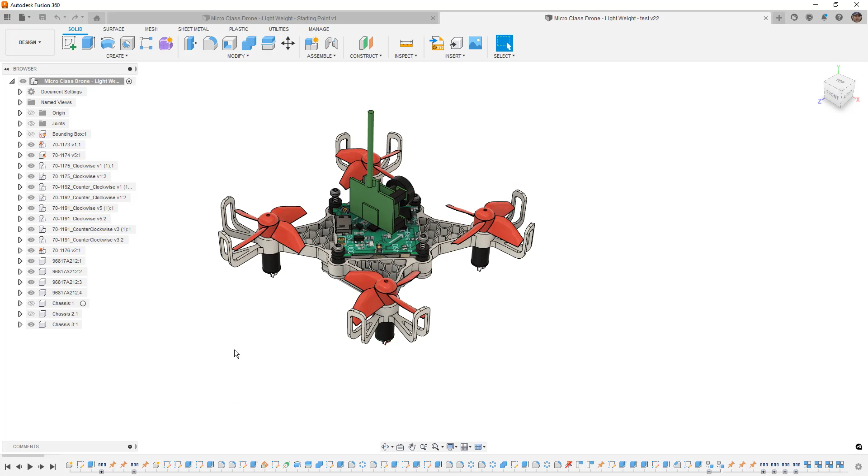So with that in mind, what you see on the screen is going to be a sample. We're going to design something similar to this, not exact. Now, I have printed this chassis and flown it, and it does pretty well. And we're going to talk about some of the criteria, the design elements that we need to follow for that. The starting point that you can download is going to be the motors, the propeller, the flight controller, single battery, and a camera.

Now, it is important to note if you are going through the Airgineers sort of competition, in order to power the camera, you'll need two batteries or you'll need to modify the wiring so that you can plug the camera and the flight controller into a single battery. Now, there are pros and cons to each of those. The pro with running a single battery is weight. You obviously are quite a bit lighter if you're only running one battery. The downside is flight time, so that's something that you need to play with and balance.

Now, I have done an entire drone series before that's on Coursera and I believe Udemy right now. This was a full series that was, I think, in 2017, where we talked about things like the thrust of the motors and propellers and picking all those different design elements out and understanding where you sort of had to be in terms of chassis weight for the performance that you were getting. We're not going to be going that deep into it, but I will give you some basics on some of the ranges that your components should fall into.

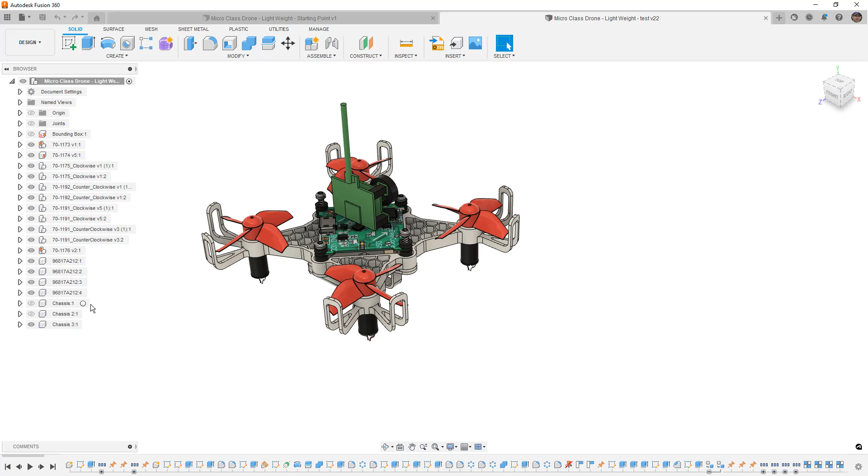So with this chassis right now, this is going to be around 7 grams, and it's missing some components still. So when we look at the physical, you can see mass here is 7 grams. The thing that it's missing is a camera mount. Now, you don't necessarily need the camera or 2 batteries to fly this thing. You can fly it with line of sight. But if you do want to use the goggles and you do want to fly it as a first-person experience, then you will need to include those elements.

Now, the 7 grams for the chassis right now, again, doesn't include any of the components like the motor, the prop, the controller. Those are all sort of fixed elements. Everybody would have those, and it's not going to matter if your design has something different in those areas because they're all going to be the same across the board. That's part of the reason for the competition. A starting point, everybody has the same equipment. Where you're going to want to focus your attention on is the main chassis, as it's going to be the biggest item in your entire design.

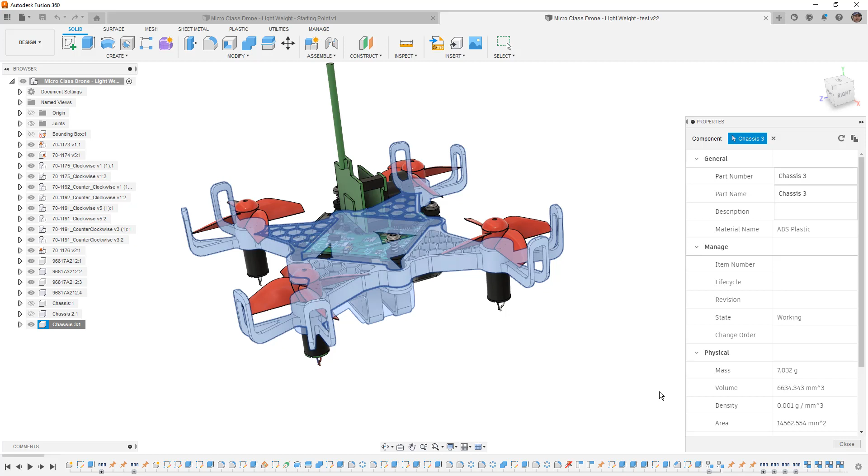Now, when I did this course originally, I found that all of the plastic pieces together around 10 grams was sort of the upper limit. You didn't really want to go past that 10 grams for all of the plastic components that you're using. And the reason for this is that you just don't really have the thrust or the propulsion to make that work. So with that in mind, the main chassis should really be somewhere around 4 to 5 grams. The lighter, the better, obviously. And that's a balance that you're going to have to figure out where you really want to spend time saving weight.

Now, what I ended up doing for this original version is I really wanted to focus on using some lightweight techniques, in this case, using some sort of hexagonal structure and very minimal frame around the outside. You can also see that I added some additional components underneath here. These thin pieces were screwed on with the same screws that held down the flight controller and the camera, and they're used to house the battery and prevent the battery from sort of contacting or going into this pocket area.

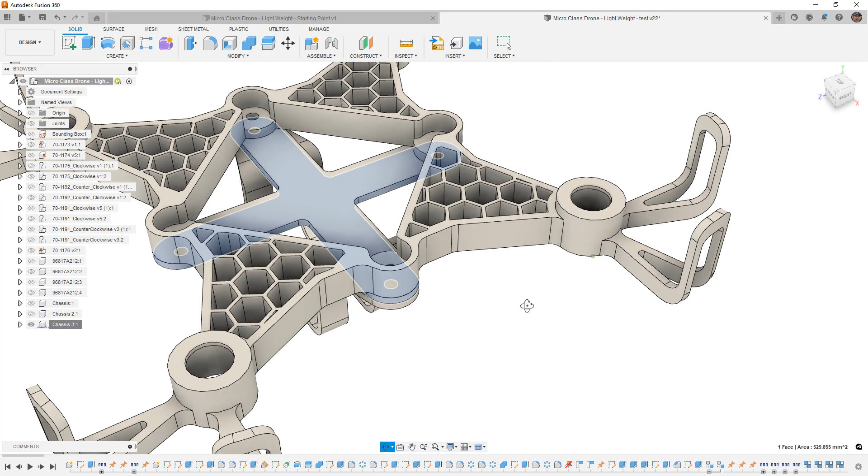And there are a couple of reasons why I went that route, and we'll talk about that just a little bit. But this is going to be sort of the main workflow that we're going to talk about. With that in mind, there are a handful of general design notes that we should cover as well. After we get through these design notes, then we'll start to get into the CAD section.

But if you're watching this video, you're likely interested in understanding some of those design decisions along the way, and having a good foundation for what your end goal is important before you ever start any sketches or features. So the list, when I think about a project like this, the first thing that comes to my mind is what method are we using to print?

Now, in this case, I'm using a desktop FDM machine or FFF machine. That is going to be, for me, a Creality Ender 7. And this is a really good machine because it's relatively fast. There are plenty of other machines on the market depending on what you have access to, whether it's an SLA machine or SLS machine if you're at a university and you're ordering your parts. And you can obviously choose whatever process fits your requirements. There are going to be pros and cons to each of these.

Now, with the FDM machine, desktop machines, you have a whole host of material choices. I'm going to be using a PLA, and one of the reasons I like to use the PLA material is it has really high quality on the final print. It's not really going to survive the test of time, and it's not really heat stable or moisture stable, but there is a level of the ability to biodegrade these PLA materials depending on what you have. So that for me is a big benefit, especially if I'm going to be doing multiple prints to try to fix or finalize the design. I might do a lot of that in a material that is more environmentally friendly, like PLA.

Now, obviously, if you're using like an SLA machine, you have a lot of material that you need in the resin, and then you also have cleaning material, and there's all sorts of implications to using those types of printers and materials for your final parts. So I'm going to be focusing on, again, FDM using a PLA material.

Now, obviously, if you have a pretty solid final design, you want to use something like a PETG or an ABS-like material, then you will have to think about the speed at which you can print as well as the quality of the final parts. And the reason for that is because we have small holes on this part. We have a somewhat press fit for the motors, and these are all criteria that we need to think about.

The next thing that I begin thinking about after I've chosen the printing method and I've chosen my material is going to be the geometry. Now, the geometry in this case, if we take a look at it, the reason I have included this extra piece on the bottom for the battery and this extra piece here to hold the batteries in, the reason I've done that is because I want the entire bottom portion of my chassis to be flat.

Now, the reason I want it to be flat is because I want to print it completely flat on the build area without any supports or raft or anything that I have to clean off afterwards. With that in mind, everything here that you see can be printed unsupported. There is one slight exception to that rule, and that's the little lip at the top. That is going to be the stop for the motor. Now, we can get around that because the top of the motors aren't completely flat. They do have a little bit of a radius to them.

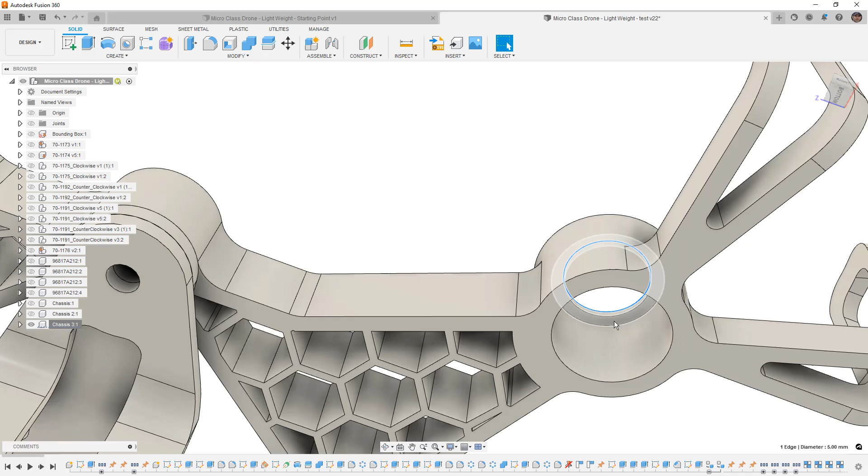So you can put a small lip on the top and a very small chamfer on the inside and help with that unsupported nature. You obviously wouldn't want to make this diameter very small because then you have this huge unsupported area. And if you have support material building in that area that you have to clean out, it's going to be a mess. Now, some printers are better at the support material than others, but I've just found in general that these FDM machines, if you can get away without support material at all, your final design will be much better off. And that's simply just because you don't have to sit there and post-process it. So that is a reason why we have these extra little pieces.

Another reason here is that these can be printed relatively thin. They're not structural in nature. This is going to be holding the batteries, and this is really just a block plate. So this can be relatively thin. It doesn't have to be printed very thick. And if we take a look at this, you can see that if I look at this in millimeters, so right now we've got secondary units in inches, 1 millimeter thick, 0.039 inches.

That is a really thin part, and it works just fine in practice. I'm running the screws all the way down through all of these. I do have nuts that I could put on the backside. I have found that I don't really need them as long as I drill these holes out the right size.

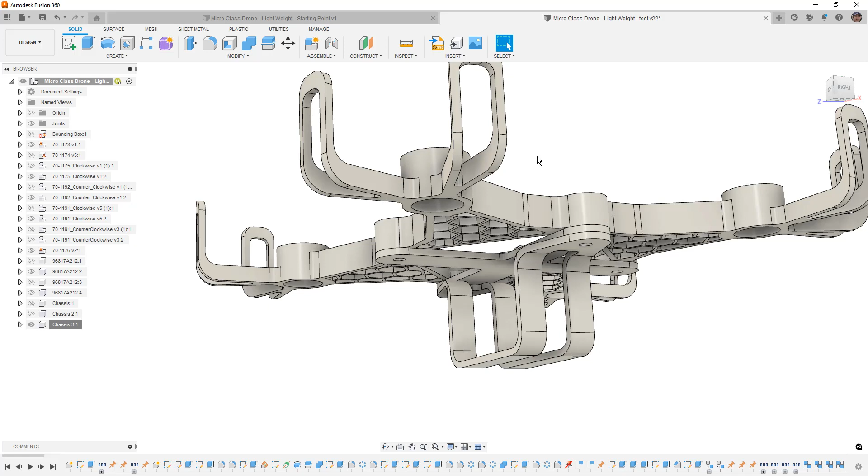So, those design elements of understanding the limitations of the printer, whether or not you're going to be designing for support material, and things like what the overall unsupported angle your machine can print is. Now, with the Creality that I'm using, it's 49 degrees. I can go up to 49 degrees and it will do just fine.

Anything above that, you start to run the risk of getting these strings in the air from trying to print on this unsupported area. Sometimes it'll work okay depending on the orientation of the slicer. Sometimes it won't, and it's kind of just something that you have to think about. So we're going to be going forward looking at building something without support materials at all, and that's going to influence our design decisions as we go through.

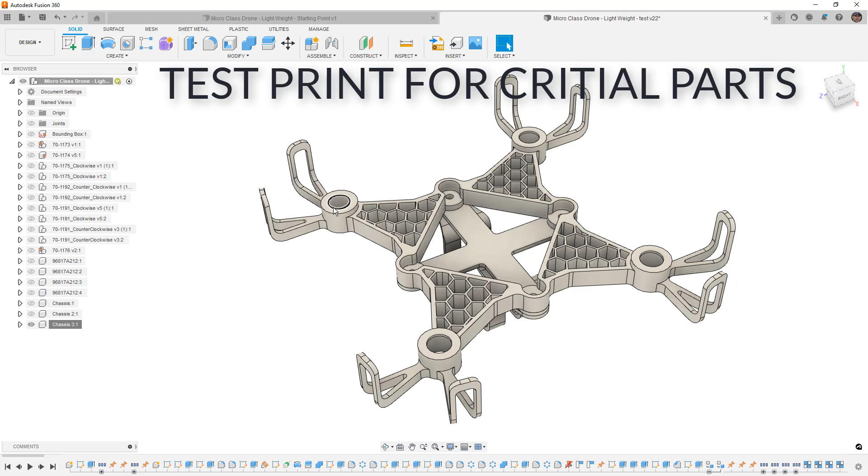So another thing that we also need to think about is going to be test prints. And what I mean by this is that if you print a 6 millimeter diameter boss, is it actually 6 millimeters when it comes off the printer? Now, you'll find that depending on the material you're using, depending on the printer itself, depending on its resolution, the resolution of the STL file that you output, all of these different factors are going to come into play when you talk about the size of those features.

Now, in this instance, I have done a couple test prints to figure out what size I need to print to get a good press fit on the motor. You don't want it to be too tight, but you also don't want it to be too loose that you have to glue the motors in. These motors are small and they tend to burn out after a certain amount of time, so you want to be able to replace them if needed.

So what I found through some testing is that if I design a boss at 6 millimeters, it actually prints out at 5.7 millimeters, give or take. Now that means the 6 millimeter motor is not going to press into that. It's just too far off. So I need to up my size by about 0.3 millimeters. So if I print 6.3 millimeters, I end up with about a 6mm boss so I can press the motor into it. This is something that you need to figure out when you're doing your design, is to really understand what the resolution, the final output of your part is going to be.

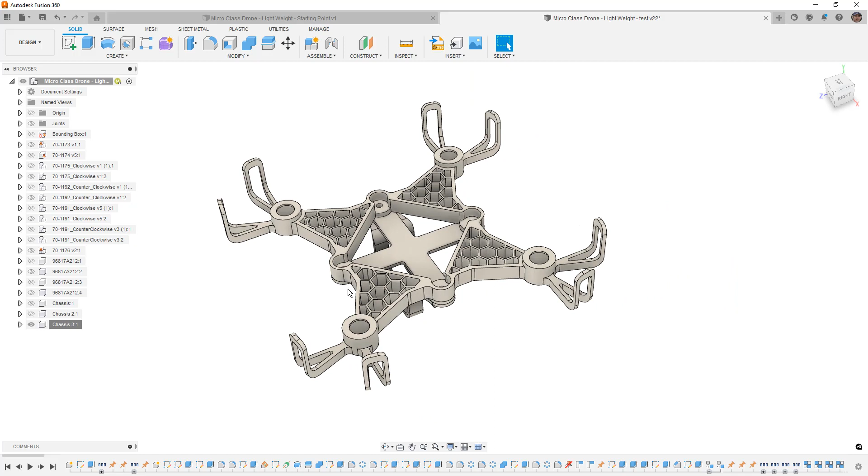So now that we have all of that out of the way, I'm going to move over to the starting point. This is the data set that you can download, and we're going to talk about how I would start a design like this. So first of all, the camera, I don't really need to see it. It's not going to be a big part of this. The flight controller is important, and some of the reasons for that is because we need to make sure that our chassis design doesn't go over these connectors. We need to go around the outside of those connectors.

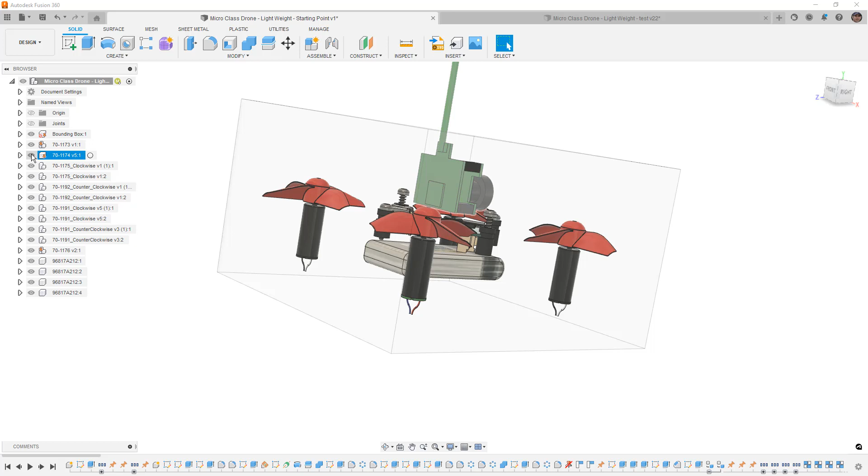The propellers are going to be somewhat fixed, and the reason that they're where they are, again, is based on a bounding box for the competition. Everything needs to fit within that, including the camera, not the antenna on top, but there are requirements that you need to follow if you're going to be using sort of the Airgineers format.

Now, I think it's good as a practice to have an end goal and some design constraints. Otherwise, you can just go down this sort of endless design iteration. You need to have an end goal in mind, and the end goal for us is going to be a chassis, and we're going to shoot for around 4 grams with an ABS material.

What I found that is also important when you are printing, depending on what printer you're using and what slicer, is when you slice the part, oftentimes it'll tell you how much material is being used, and you can kind of correlate that to the mass properties in Fusion or whatever CAD file you're using to see how close those are. So if I say that my chassis is 4 grams and I take it to the slicer and it's telling me it's 6 or 7 grams, that's obviously a very big difference, and we need to understand and account for that.

So with that all out of the way, let's go ahead and get started on the design.

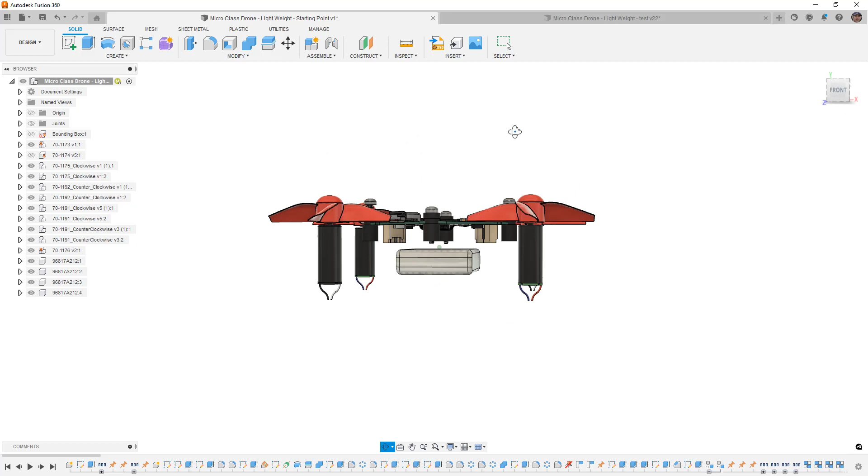So when we think about a design, there are many different ways that we can go about the overall process of design. We need to think about if we want propeller guards and how much we want to build out. If we take a look back at the Airgineers site and we take a look back at the original design, you can see the original design goes completely around the propellers. It's offering up an entire guard for those propellers.

You can see that the design that I did actually went a little bit further with that concept and made some cones to help funnel the air and get more lift. Now, ultimately, that's a lot of weight that you have to add. So these are all design decisions, and if you want to go the route of building an entire shroud for the propellers, then there are other aspects of the design that are going to be problematic. Things like the camera view, the overall mass, and all of the components there. So all these are important considerations that you need to think about when you're getting started.

For me, when I want to start a new design like this, I think about symmetry. Now, this entire design is based around the origin. If we turn the origin on, it's right in the center of the controller, and everything is going to be able to be patterned. So we can just work in one quadrant, and I like to focus on the upper right-hand quadrant. This is typically quadrant 1 or the positive quadrant if you're thinking about a coordinate system in math. So I like to focus on that, which is going to be X and Y positive in general.

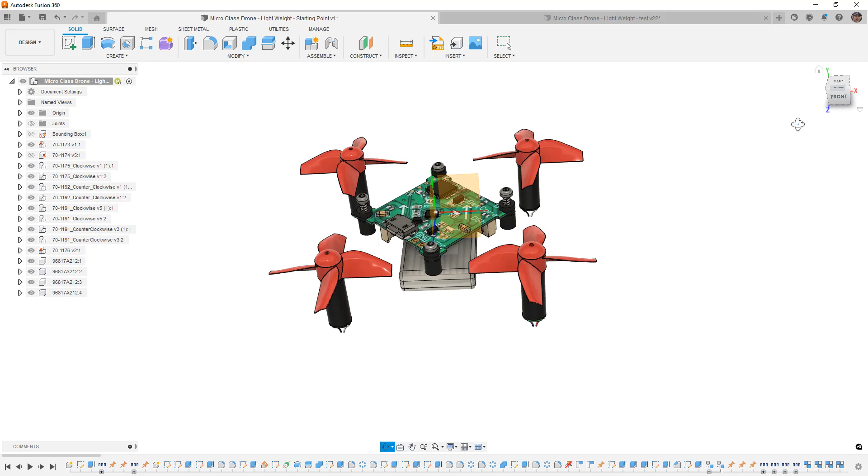Now, it depends on the orientation of your design. This is built in the Y up orientation, so really it's looking at positive X and negative Z. Doesn't really matter because as soon as we make our sketch, we're just dealing with X and Y. So I want to focus on that upper quadrant. So none of this stuff really matters to me. I'm going to leave it visible for now, but it really is just going to be a pattern.

And then what I want to do is I want to think about how I want to ground or start my design. Now, the main aspects of this design are going to be the top of the motor. So the top of the motor here is going to be sort of a fixed position, and the bottom of these spacers for the flight controller. So those two areas need to be connected, and everything else is just going to be extra. So really, I want to build from the top of the motor down to the bottom of that spacer, and that's going to be my starting point for my design.

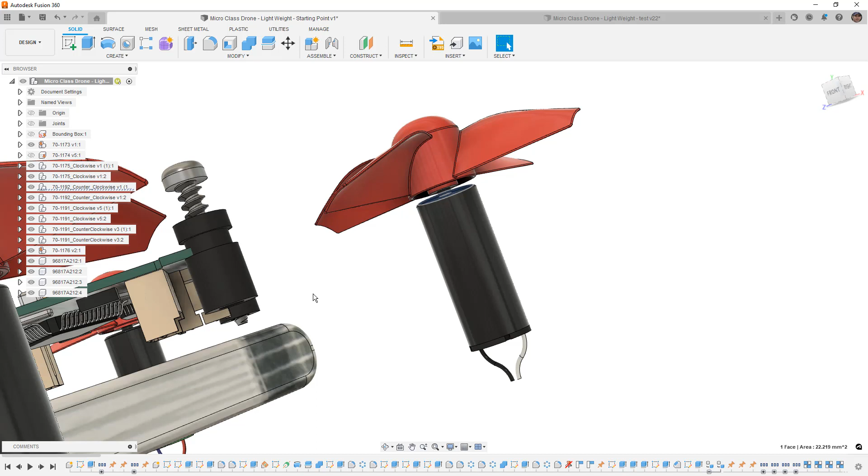So I'm going to select the top of the motor, right-click, and create a sketch. Now, when we start the sketch, I want to start projecting some elements. First, I want to get rid of the propeller for right now. I'm going to bring it back, and I'm going to use Create, Project, Include, and P on the keyboard, or select Project here. Now, what I want is going to be the outside of the motor and the outside of each of these bosses. And remember, we're working in this quadrant, so we're going to be connecting these together.

The other thing that we need to think about, again, is going to be obstructions on the flight controller itself. There are connectors underneath that need to go down past the battery, and if we build too much underneath the board, then we're going to have problems. So what I want to do is I want to think about the sizes that I need, and I'm going to use the circle tool to get started. So from the center here, I'm just going to draw a couple circles. I'll dimension them after the fact.

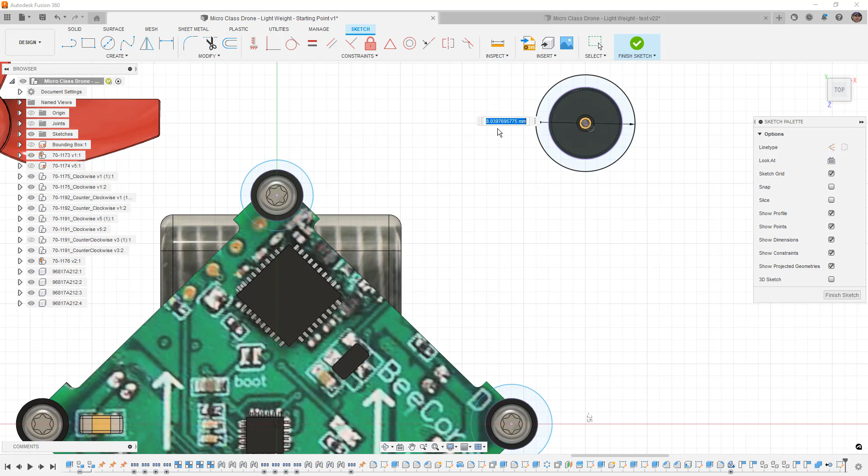I know that this one here is going to be 6.3 millimeters. Again, that's based on the fact that I did a test print and I know how big this needs to be in order to print, so I'm going to say 6.3 millimeters. Another thing that I like to do is turn these inside edges to construction.

So I'm going to say construction for that, and if there's any inside, we're going to say construction there. And the reason for that is when we select this geometry, we want to be able to just select this and get just the full circle there without grabbing all that other stuff. So you might want to go in and just make some of those other projected lines construction.

When we're thinking about the flight controller mount itself, we want to give a little bit of a buffer because these are actually rubber spacers, and when you tighten the board down, they tend to swell a little bit. We want a support structure in place so that they don't swell too much, but we don't want to just exactly match that size. Things in CAD tend to be very precise, but when you get to the real world, you'll find that these spacers might be a little bit bigger, a little bit smaller. The print might be a little bigger or smaller. We obviously know that the print itself needs to be just slightly larger.

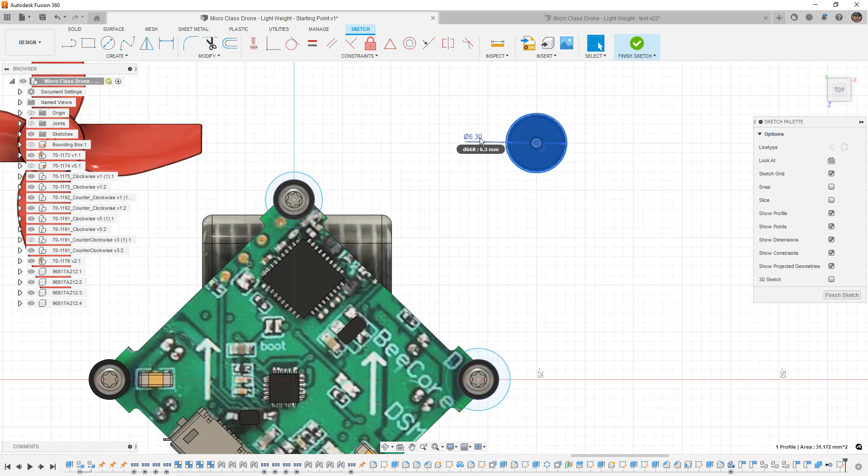So what I'm going to do is I'm going to dimension these, and if I give it a 5 millimeter dimension, you can see that gives me a little bit of a buffer there. Now at this point, we need to think about constraints and constraining all these elements together. If I add another dimension here and click on this 5, that'll link them together. You can also use the equal constraint. It kind of depends on how you like to work.

Now, if I'm adding dimensions, oftentimes I'll link dimensions together simply because it's just quicker if the dimension tool is already active to click on another element and click back to that first dimension rather than hitting escape to get off the dimension tool, selecting the equal constraint and selecting everything. It's just a little bit more efficient in the overall process of the design. And depending on what the end goal of your part is, whether or not you have 2 dimensions or 1 dimension and 1 constraint, it's not going to affect the performance of the design drastically.

So now we've got sort of our grounding points on the design. Everything here, again, is going to be patterned around. It could be circular or rectangular because this is a square. It really doesn't matter how we do that. But in this case, it's important to note that we're building everything from sort of the midline here and the midline here because everything's going to be patterned around.

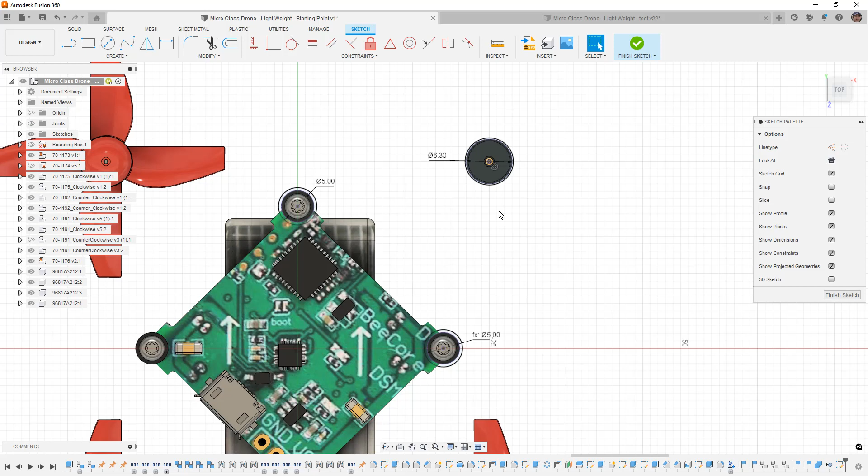The way that I like to think about my designs initially is I like to just start with lines from the center points and just see what that looks like. Now, if I'm happy with that shape, then likely I'll just continue on with that shape. Now, in this case, I don't want to go center to center.

If we look back at the other chassis that was drawn, you'll notice that there was this sort of horizontal section. Now, it looks like I'm on perspective only. There was this horizontal section where I came out from the mid and then I went up, and this is not the center point here, but you can see that I came out straight and went up and left this bump here. Now, part of the reason for that is to minimize material.

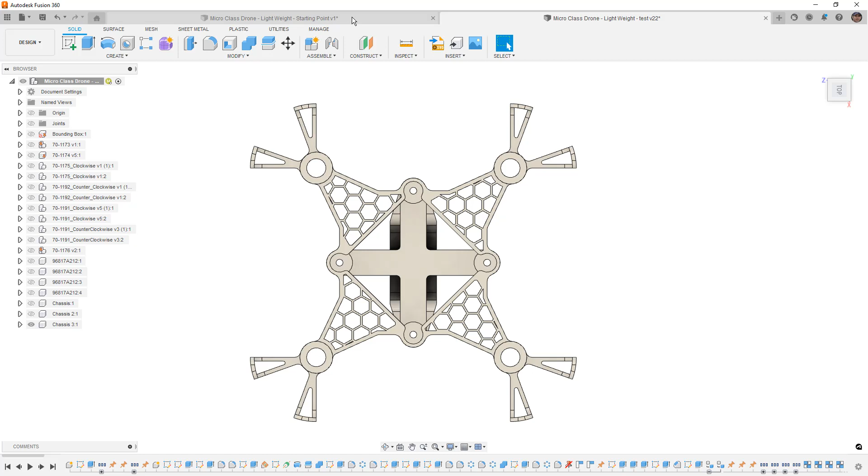You really don't need a ton of material. We're not talking about a ton of thrust or force from these motors, and you're really not talking about a huge overall mass. So the forces in the chassis are not really very high to the point where we need to worry about all of the extra pieces.

So some of the initial chassis that I played with, I've designed probably dozens of these at this point, but some of the initial ones I've done straight lines. I've also done straight lines between the props and built a square. But again, we want to minimize material. We want to be as efficient as possible. So I'm going to take these lines and I'm going to delete them. And I'm going to start with sort of the same structure.

I'm going to come out horizontally, and then I'm going to come up to that outside cylinder. This one will be vertical, come up to the cylinder. And then for me, I'm going to go center to center here. And then I'm going to draw center and perpendicular to the midpoint of that line. Now, I don't want to use this line, so I'm going to hit X to make it construction and X to make that one construction. Now, I'm going to use some constraints. I'm going to make this line and this line equal, and then hit escape.

Now, the reason for that is because I want things to update and adjust very nicely. Now, we still have an issue in that these points are not the same. Now, you might be thinking to yourself, we have this line. We could simply just mirror whatever we draw here across this line, and that is perfectly valid. That doesn't always work. In this case, it does because we're dealing with a square, but it doesn't always work

out quite that nicely. So one way that we can go around this is by using additional constraints or by using additional construction geometry. So what I'm going to do is I want to select this point here and this point, right click and say OK. That's going to essentially be escaping off the line tool.

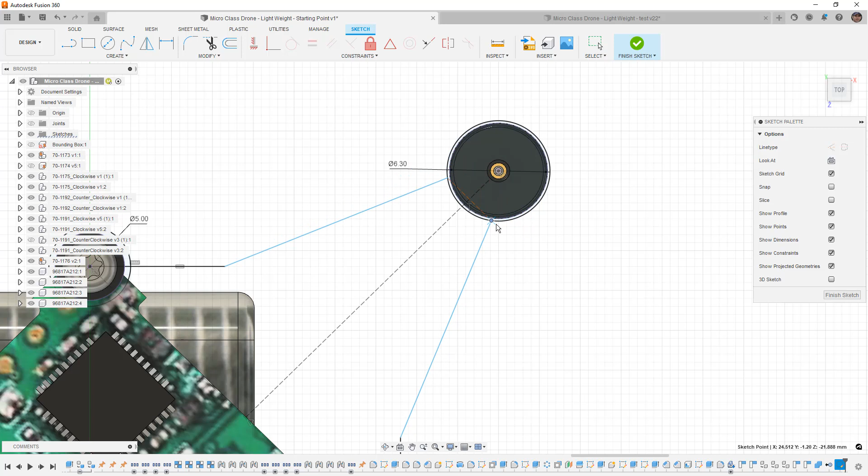Now, if I make this line perpendicular to this line and I hit escape, I'm going to go ahead and make that construction as well. Now, these are going to move the same. And really all I have to do to fully define this is tell it how long I want this line to be and what angle I want these to be at.

So I'm going to give this an 8mm dimension. And then let's go ahead and give an angle here. Let's say 20 degrees. That looks probably a bit too wide. Let's say 22. I think that looks pretty good. Now, the other thing that we need to think about again is connecting this to make some sort of solid structure. So I'm going to escape to get off my dimension tool.

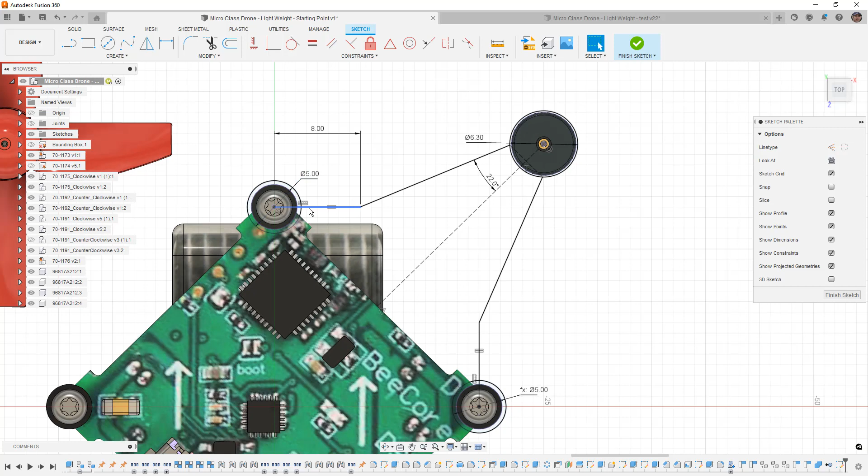And I really don't want to build underneath the board. The board is supported by these spacers. It doesn't need any material underneath it except for where the screw is going to be. So really what we could do is we could build out as far as we want, as long as we have material connecting these. So this is a relatively small amount of material here. And another thing that we need to think about is this is the inside wall of the area where our spacer is going to be.

So we actually are going to add additional circles, and I'll add another one down here. And these are going to have whatever overall wall thickness we're going to work with. So for me, I'm going to focus on 1mm. And in this case, let's go ahead and use the equal constraint just to show the difference. So I had to get off the dimension tool, select the constraint tool, and then select both of those.

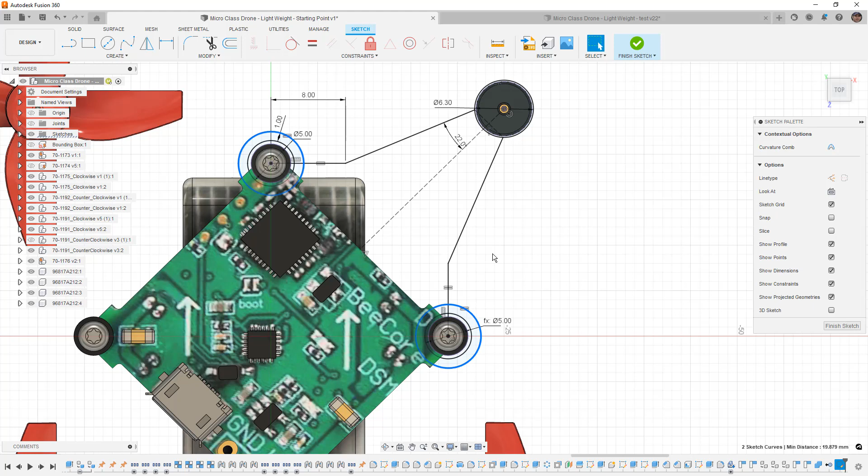Now, if you have been using Fusion for a while, you might have also noticed that the right-click menu, if you make a selection, will list any constraints that can be applied here. So two circles we can have equal. They could theoretically be tangent to each other if their centers weren't already fixed. We could fix, unfix them, basically lock them down without giving them a dimension. And again, if their centers weren't already fixed, we could make them concentric.

So that right-click menu is pretty handy, especially noting that it's contextual. So two lines, we could do collinear, parallel, perpendicular, equal, fix, unfix, and so on. So that is a slightly quicker way to get to your constraints, but it still, for me, takes a little bit more time than just making an equal dimension.

Also keep in mind, if you use tools like offset, you can add an offset dimension, but each time you select additional geometry, it will add that additional dimension, and those will not be linked together. You'll have to go back and manually link them or delete them and make things equal. So again, it's just a matter of efficiency. Not that one way is right or wrong, but I find that using the linked dimensions is quite a bit quicker, especially as you're progressing through your design.

So now that we have this additional thickness here, that adds a little bit more material here, and I can take a line and I'm going to go from sort of this inside section down to this one here. And once again, we're going to make this perpendicular. And really, as long as we stay outside of this portion of the board, we'll be fine. But I want to give it as much room as possible.

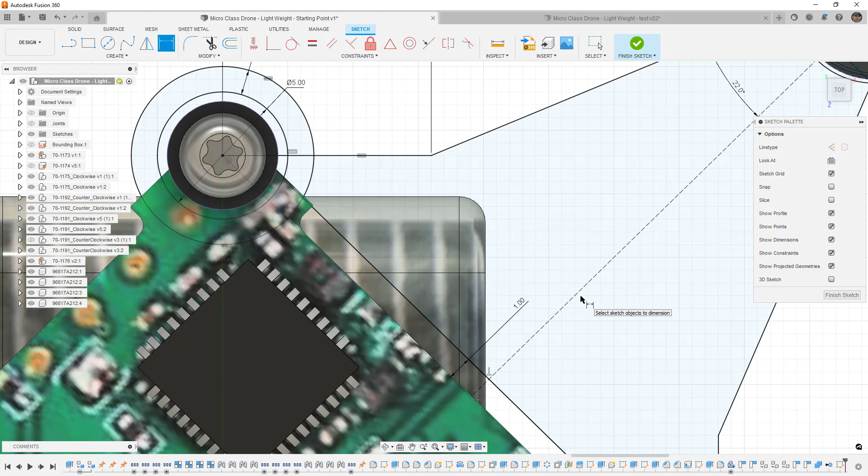So what I'm going to do is I'm going to figure out what this distance here between that point and this line is going to roughly be. So I'm going to use D on the keyboard for my dimension tool. And it looks like it's about 1mm. And I think that's going to be fine for us.

So again, what we're really looking to do is we want to make sure that we build a chassis that is as light as possible. Now, if you find that this isn't enough material, this line doesn't have to go to the center of the screw boss. It could raise up, or we could determine a different angle here. So if we were to change the angle and shorten that line up, we could potentially get this just to angle all the way back into this piece.

I think it's going to be fine for what we're doing. There will be more material underneath holding it together, potentially. So just keep that in mind that we're going to add things like a fillet in this corner, which will bridge this down. That can be a relatively large fillet. All of these different things that we can do.

So now that we have this, we also need to think about the fact that our circle here is going to be the small diameter that's going to be around the motor. So we need to think about how much material we want around that. Now, in general, what we're looking at is a millimeter, which actually isn't very thick. You might potentially get deflection issues when you press the motor in to something that thin. For this example, I'm going to go ahead and stick with a millimeter.

I'm going to link it to another dimension. And once again, this helps me because all I have to do is go back to this dimension, and let's say I want it to be 1.5. All those elements will increase together, and I don't have to worry about adding additional dimensions. One thing that we can also do is we can name this. So I can call this wall thickness and say equals 1. So now when I go into my modify and change parameters, I have this custom one that was called wall thickness.

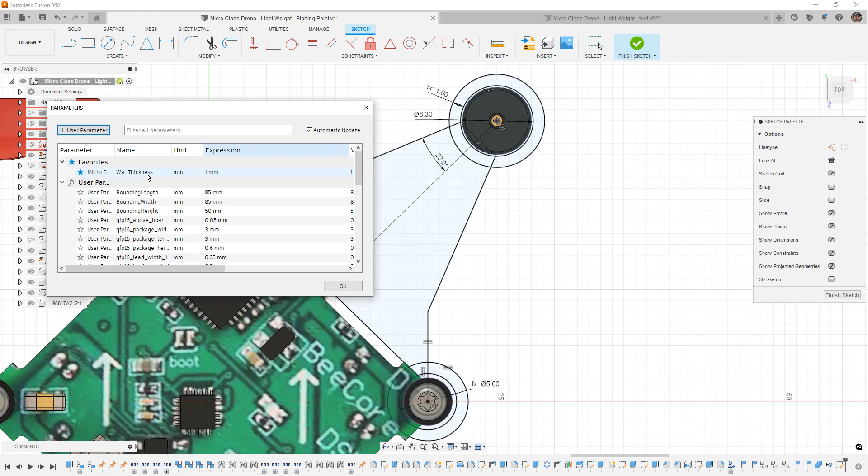So you might notice that recently, the end of November, Fusion updated. There are a couple things that changed. One of them is the parameter dialog box. All the same stuff is still here. However, you'll note that there's a filter for parameters, and now there's a plus user parameter at the top, where it used to just be a plus icon down here. Now you have to hit it here to add it. Still the same functionality, it just looks a little bit different.

Now, in my opinion, this looks a little bit more like a Mac menu than it does a PC menu. I don't know if that has changed on the Mac side as well, but that's just my initial impression of that.

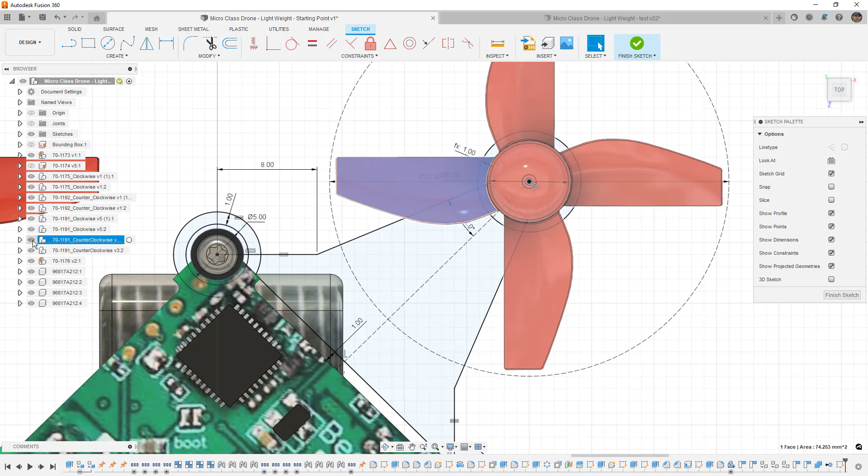All right, so now we've got quite a bit of a sketch here. We can start extruding this. Actually, you know what? Let's go back into that sketch. There's one more thing that I forgot to include: some sort of reference for the propeller. We don't necessarily need it right now, but sometimes it's good for us to have a reference in our sketch. So that's 32 millimeters. I'm going to turn that into construction because I don't really need it right now, but it is nice for us to at least have that there so we know what the extent of that is.

And part of the reason is we're going to have to build some sort of propeller guard. It's not necessarily required, but if you're flying this thing around trying to go through gates or happen to bump into the wall, you do want some protection. Now, in the last design I did, I actually had these little ears that came up, and they printed relatively well, but I found out that if you bumped into anything, all it really did was push these into the propeller. So in theory, it worked, but it didn't have quite the effect that I was hoping.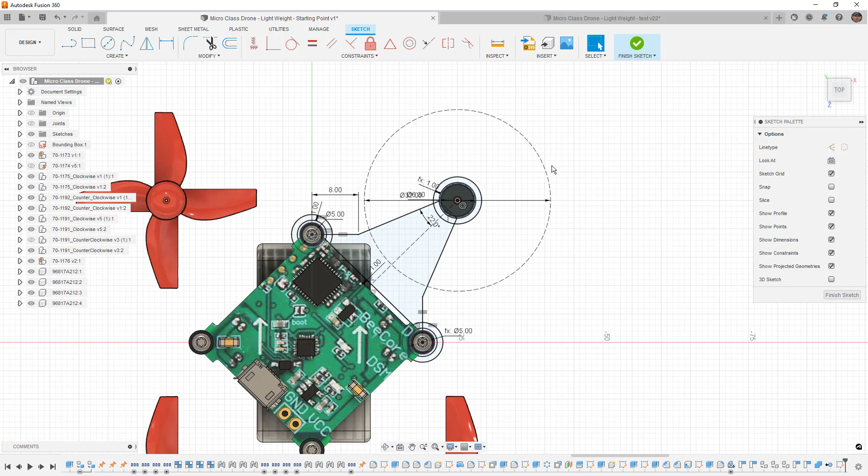So what we're going to do, instead of creating this entire outside profile, we are going to create somewhat of a semicircle. So this upper right-hand quadrant really only needs to go from the vertical position and down 90 degrees, because if we hit anything on the right side, then the prop guard around the bottom right one is going to also contact. So really, we don't need more than 90 or potentially 100 degrees, an extra 5 degrees in each direction. And it doesn't actually have to be the complete arc profile.

We could put a point here, maybe one in the middle and one out here. So these are all things that we want to think about. We're not quite there yet, but again, it's just good to have that reference.

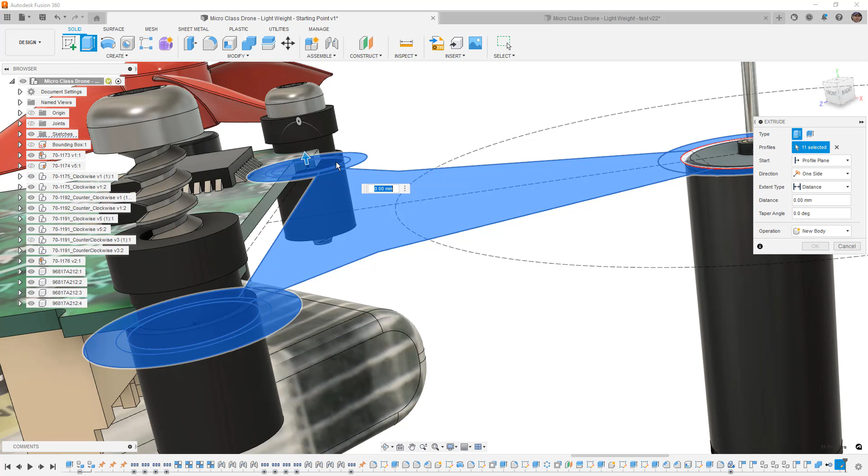So now that we have this geometry, I'm going to start to extrude it. I'm going to pick the areas that I want to extrude and make sure that we grab all these little segments. And in this case, remember, we're going to leave a little bit more of a gap around here, but I am going to include the centers for right now. And then I'm just going to pull this down.

And what I want to do is I'm not going to be cutting. This is going to be a new body inside of our component. In this case, actually, we should have probably created a new component to start, but I'm not going to worry too much about that since we're focusing on the design.

But what I want to do is I like to use the intersect tool because this gives me sort of a visual reference about where things are. I can kind of see what objects I'm overlapping. So in this case, we're overlapping those spacers and the motor, and we can determine whether or not we want to keep those.

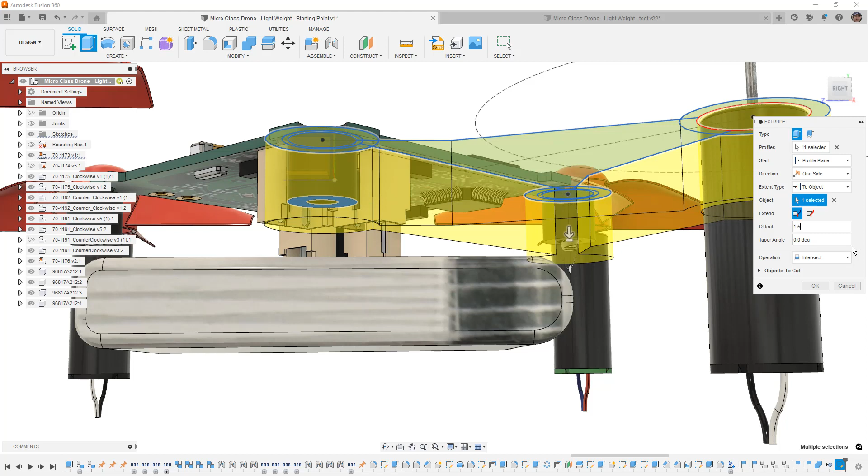Another thing that we can do is to go to an object. In this case, we'll select the bottom of that spacer, and then we'll add an additional offset. Now, our wall thickness is going to be 1 millimeter, but I don't want the bottom of this to just be 1 millimeter. I'm going to have a little bit more since I do need some engagement with the screws. So I'm going to add 1.5, and then we're going to change it from intersect to new body.

Now, the reason I want to do new body and not new component is because if I create a new component now, that sketch is going to still be at the very top level. So what I want to do is I'm going to roll this back before that sketch. I'm going to create a new component, call this chassis. It's very easy to forget this step whenever you're sort of creating your models. And then I'm going to expand this and roll to the end of my timeline.

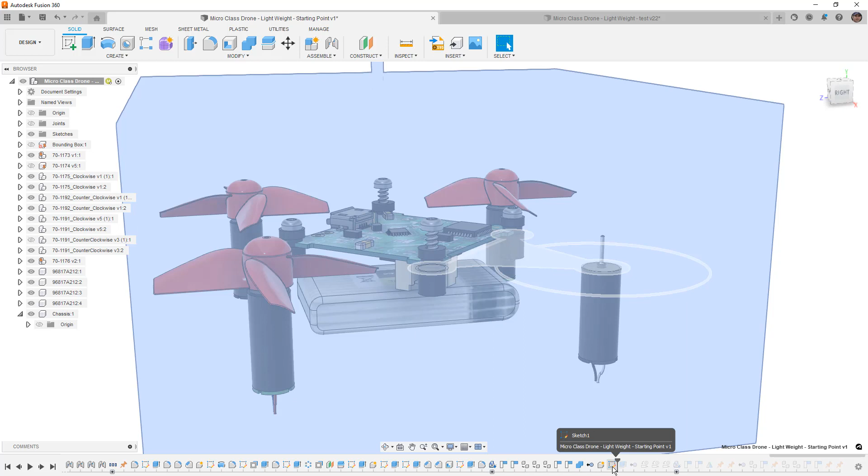And you can see there's a bunch of other stuff in this timeline. Not too worried about that. So what we can do is we can note that our sketch is going to live at the top level of the design. We can activate our new component and then carry on with the extrude from there.

And make sure that we grab all of those areas once more. Once again, we're going to do a solid center section because we're going to come back and add the holes and the other features later. And I want this to go down to the bottom of my spacers. We're going to offset it 1.5 millimeters.

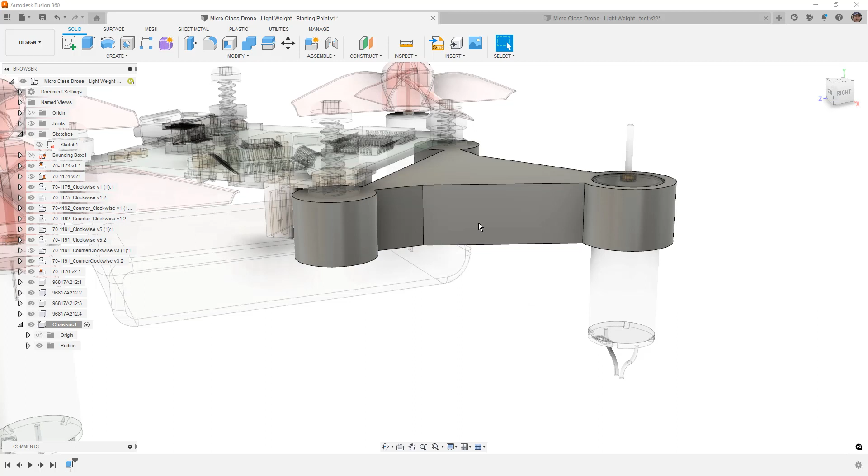And now that we're inside of the component, the new body aspect is going to be automatic and it's going to live inside of this chassis. Now what this means is that I can't go back into the sketch inside of the chassis component. I always have to go back to the top level. Once again, it's not necessarily a deal breaker. It's not a huge problem, but it is something that you should be aware of.

Now, before I get into adding the little lip on top of the motor, what we really want to think about at this stage is how we want to remove weight from this. So at this point, I'm going to right click on the chassis. I'm going to go to physical material and I'm going to give it an ABS material.

Now you can give it whatever plastic material you want. Do it at the component level. That means any bodies we create inside of here will automatically inherit that material. And then we can take a look at the mass of the bodies individually if we need to. So this body right now is 1.8 grams.

Remembering that it's only a quarter of the chassis, we still have a little bit to add and a little bit to remove. This means that this portion alone is going to be 2 grams on each corner. So we're already at 8 and our target for the entire thing is 4. So we obviously need to remove some material here before we really get committed to the design.

Now there are a couple of ways that we can think about this. Now if you want to just remove material where the propeller is and then allow your slicers to just do a very light infill on the rest, a lot of slicers will have options where you can determine the wall thickness.

So we could go in to, in this case, the Creality slicer and say the infill wall thickness is going to be 1 millimeter, and then we could just let it do some sort of gyroid infill and reduce the mass that way. Now that just looks basically like you're flying a big block around, and while you might have the mass actually down to a fairly low number, another thing that we need to think about is the airflow underneath the propeller. Now airflow is very important when we talk about these chassis.

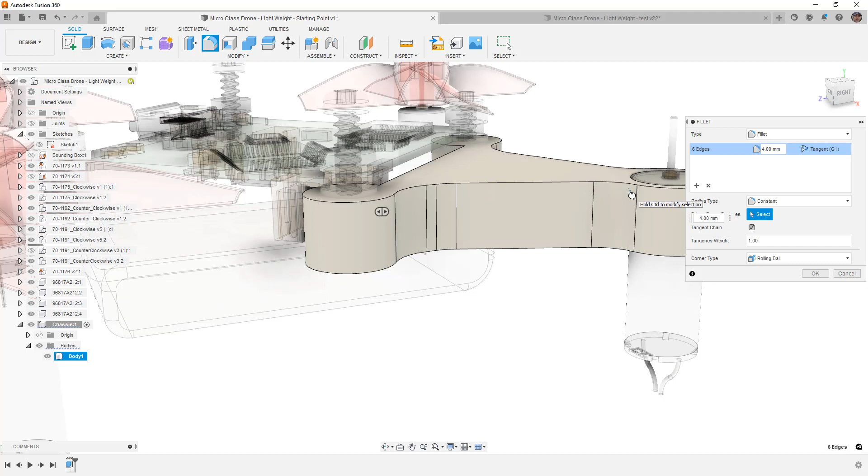So the first thing that I want to do is I'm going to add some fillets. All of these corners on at least the outside portion, I'm not too worried about the inside just yet. All of these corners, I want to add some fillets. I'm going to begin dragging this out, and it looks like maybe about 4 millimeters would be okay. And the reason I want to do that is because I'm going to be using the offset face. I'm going to select this sketch. I'm going to offset the face.

The inside portion, we really need to drop down. We need to extrude down a bit. So I'm going to show my initial sketch again. I'm going to say extrude. And now what we want to do is we want to take down these inside sections. And we're going to take them down to the bottom of those spacers. So if you just have the distance activated and you select something, what Fusion will do is it'll measure that.

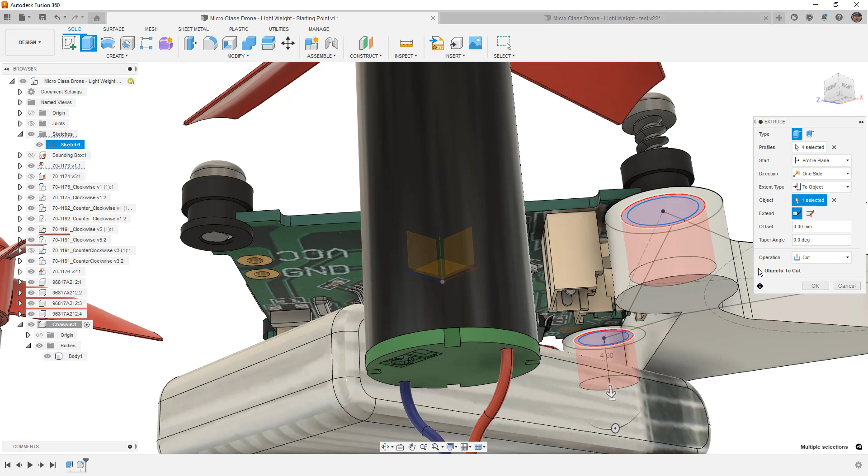Now, if you want to actually maintain a parametric link, then what you should do is you should select that object. You'll notice that all the spacers are getting cut, and that's because there's really only one in the design and there are 4 instances of it. What we want to do is we want to select which object we want to cut, which is only going to be our chassis. So when we select our chassis, it's going to remove that material.

However, there's another aspect of this that we should think about, and that's the fact that we want to remove more of that boss, and not enough of it is in this sketch. So this means we're going to need our own sketch to sort of work that out. To do that, I'm going to isolate the chassis. This is another good reason to use components. Very easy for us to isolate and start a new sketch.

When we start a new sketch, we automatically will have the center points to add circles. So I can go ahead and add these 2. D for dimension, and we're going to add 5 millimeters here. And once again, it's quicker for me to just select the other one and hit enter. I could also project that from the original sketch. Either would be perfectly fine.

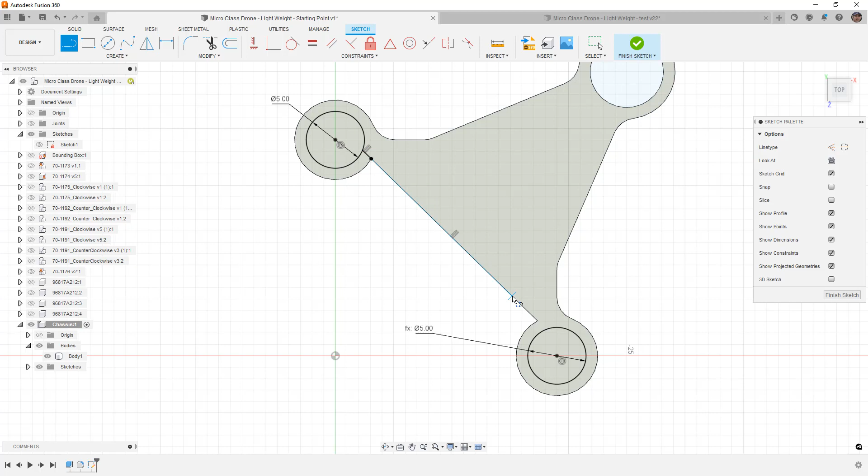Then I'm going to switch to my line tool, and I'm going to carry this line straight out. So it's going to be collinear, or perpendicular is going to be the one that it defaults to. And what we want to think about is also where we're going to be patterning this from. So I'm going to take sort of the vertical section at the top, the horizontal section here. I'm going to say coincident and select that and make those coincident. And this means that this line is going to extend until it hits that point.

Now, this perpendicular relationship is likely problematic. I'm going to delete that and make sure that this is horizontal. And this one here is automatically vertical. So what this allows us to do is it allows us to extrude these sections, which will let us remove more material. All right, so we're going to take that and we're going to extrude that down into the part. And you can see that we're removing that material.

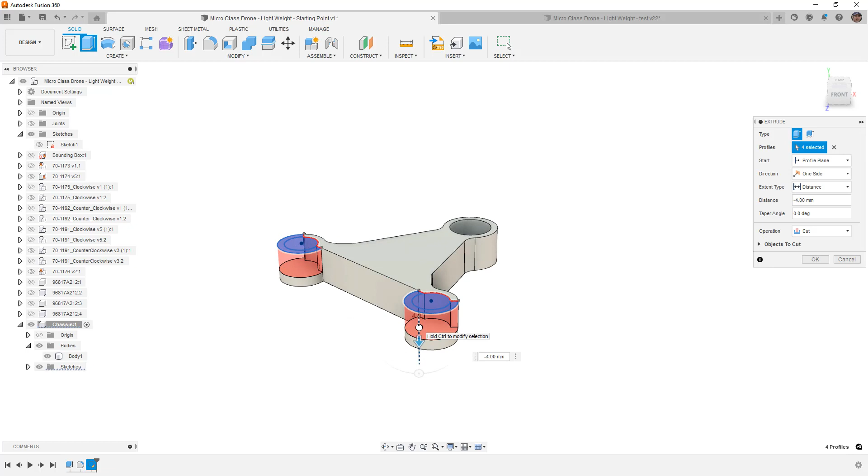Another thing that we could do, because we know that we offset from the bottom 1.5 millimeters, we could do that as a minus 1.5. And if we were driving these with parameters, we could link those together.

So if we unisolate this for a second, if we were to take this design as it is right now, if we took this body and we did, let's say, a circular pattern about the origin. So if we were just to pick the y-axis right now, go ahead and select the y-axis, there we go. We should see that where we made those cuts will perfectly intersect with the rest of the chassis.

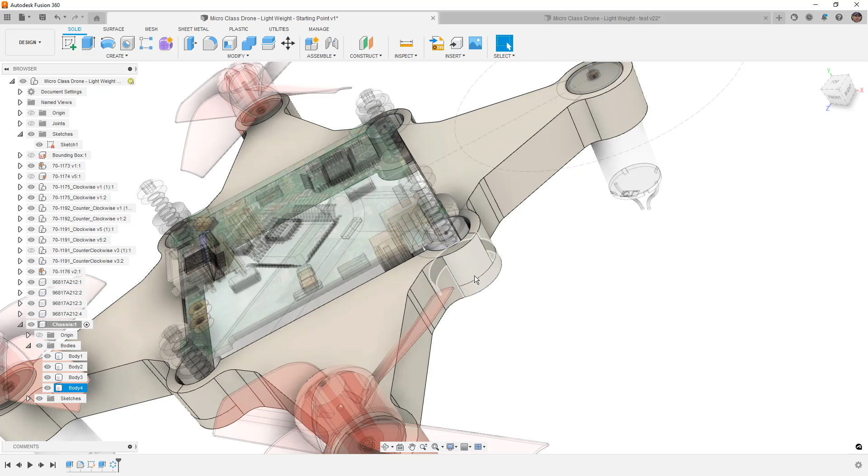And that's what we're looking for. We're looking for the ability to make that happen as we sort of pattern this around. We're not to that pattern stage yet. It's just every once in a while, it's good for us to sort of check.

So once again, let's isolate the chassis, and we're going to start to get into creating some pretty intricate work inside here. So it's a good idea to do a quick save and make sure you don't lose anything. So let's go ahead and start a sketch and use this top face here. And then we're going to use the offset tool.

So we're going to take the entire outside chassis and we're going to do minus 1 millimeter or minus wall thickness. Because remember, we used that 1 millimeter value before, so it's already in our parameters. And this right here is also going to allow us to sort of fill in the gap here. We can do this with either a circle or an arc. If we grab the arc, we want to make sure that we grab before the fillet. And now we've got this sort of inside section that's 1 millimeter offset from everything.

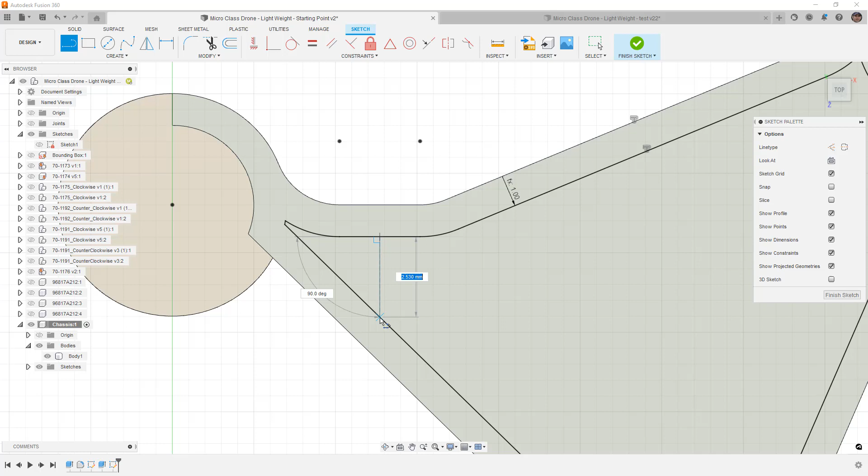Now, this can produce some problems in these corners because it's relatively tight. And what you might find is that maybe you want to manually section off the corners and leave them solid. That is a potential option. You don't necessarily have to do it, but sometimes it might be helpful to break this area up. It is important, however, to think about what we're doing here with the tools.

We're going to be creating a split. And when we create a split, what that means is that this section here is not going to work. The split tool doesn't like it when two edges overlap. It wants them to end at the same point. So it's not going to let us split this geometry nice and clean. A way that we can get around that is by trimming these.

And if you've used this before in Fusion, you'll know that as soon as you trim this, it's going to flip out because it doesn't know where those references went to. So this means that we're going to have to fix them by doing things like making these two concentric, and that'll fix that problem. And then when we trim this section here, you can see that it tries really hard to fix those constraints. It does give us some errors, but it does try to fix those. We're going to make that construction so we don't have to worry about it. This one here can be construction as well.

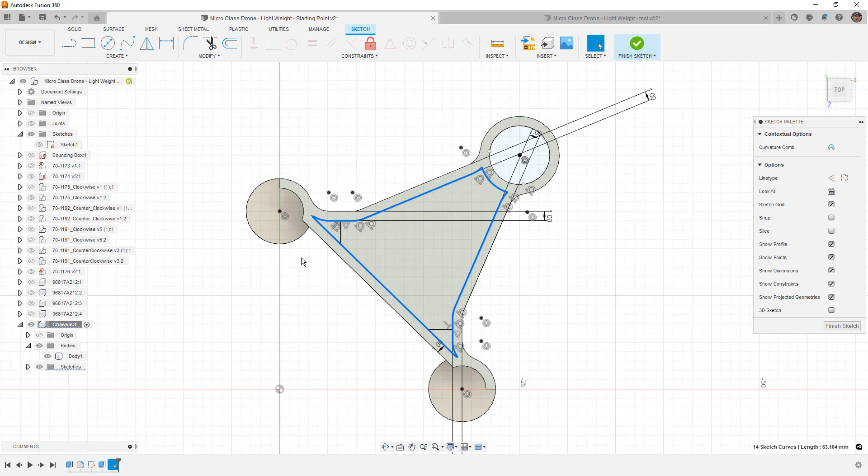And what we're looking for is when we double click this, whatever is selected here for that entire profile, that's going to be used for our split. So in this case, I'm going to get rid of these lines because I don't want to do a bunch of additional trimming. Obviously, if your goal here is to make a chassis, you're going to have your own ideas about what you want it to look like. But just keep in mind that when you do a sketch like this and you try to trim things back, you'll likely have to go back and fix some of those constraints.

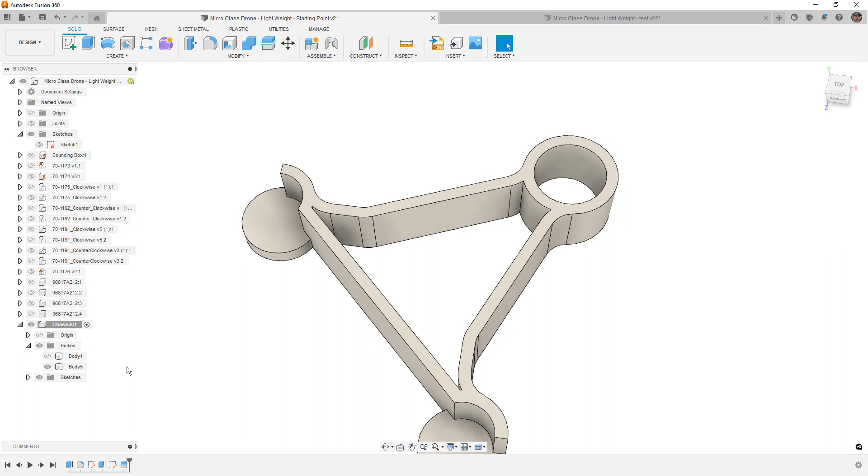All right, so now that we have this, we're going to use split body. The body to split, the tool, once again, it's going to grab that entire profile. And now what we have is we've got our main body and this center section. The reason that we're doing this is because the main body is going to be essentially our structure. The center section, we're going to hack this apart to have whatever structure we want to include for our light weighting.

Now, in the other chassis I showed you, I did this hexagonal pattern, and you can see sometimes it kind of leaves these little areas here. You can see that I sort of omitted areas in the corners. Obviously, these chassis are not identical. They are slightly different. You can see that I have more material in this corner than we have. So there are definite differences between the chassis. But having said that, that's sort of the point. This is a design exercise.

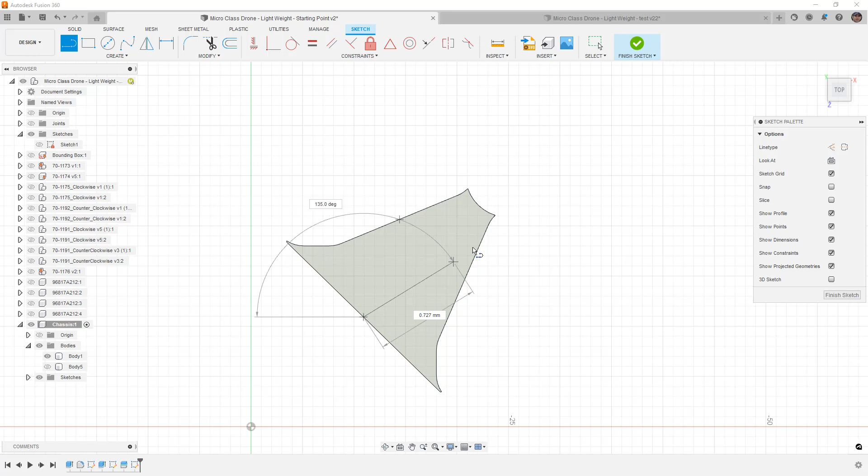So what we're going to do is we're going to sketch on the top face, and we are going to create our hexagonal pattern. Now, this unfortunately is not the easiest process to do, and you need to think about where you want to start. So what I'm going to do is I'm going to create some reference lines right here at the middle, and I'm going to make that construction.

And then I'm going to go to my polygon tool, and I'm going to use the inscribed polygon and start here right at the midpoint, and then create something. All right, we need to determine the orientation of it, and we need to create a second version of it. And these are going to have to be equal. We need to figure out what size they're going to be.

And for me, I'm going to go from here to here and say 2 millimeters. And I'm going to do the same thing over here and make those equal. And then I want to make sure that these edges are vertical. I'm going to escape, and then I need to position this one where I want it. Now the trick to this, at least for me, is once again to use my line tool. I'm going to go midpoint to midpoint, hit escape, make that construction, and then I'm going to make this perpendicular.

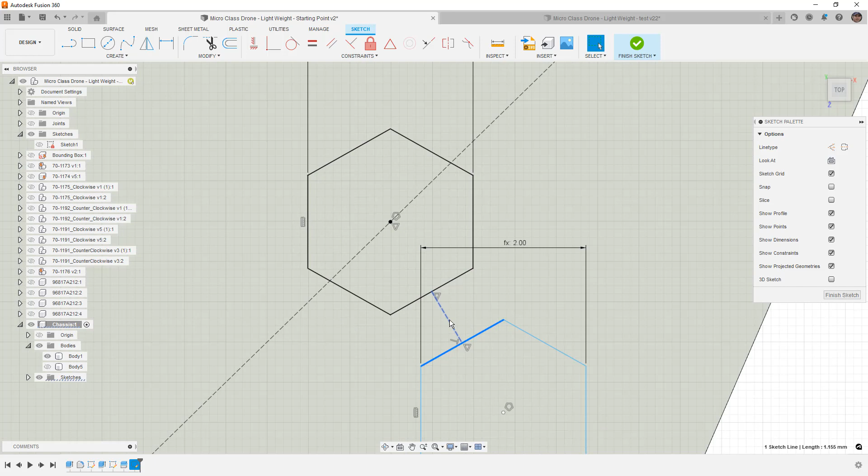Now when I make this perpendicular to each of these references, the only thing that now I need to control is the distance. Those two endpoints are going to line up, and all I really need to worry about is how far apart these are going to be. Now in general, this would be our wall thickness, but I want to minimize the mass here, so I'm going to divide that by 2 and leave 0.5 millimeter.

Now this is actually pretty important because your printer might not be able to print that. You need to do some testing to figure out if it can print 0.5 millimeter. If we take a look at this other chassis, this printed just fine, and this one is 0.5 millimeter. If I went smaller than that, it had problems. If I try to do 0.4, which is the nozzle width, or if I went even smaller, it was not able to handle it in the slicer. So I found, at least on my printer, that 0.5 millimeter seems to work okay.

Now we want to take a look at creating our pattern. Now, this is going to be a rectangular pattern. I'm going to double click each of these and then start to drag it out. Now I want to do a spacing amount, not an extent amount. And remember, we're 2 millimeters wide and we want 0.5 millimeter between. So we're going to do 2.5 in the width.

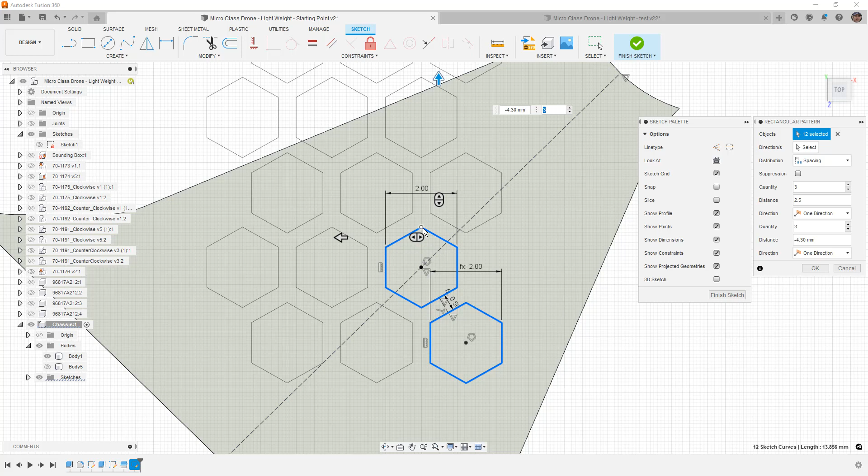Now the vertical one is a little bit different. As I start to drag this up, we need to find that balance where we hit the correct amount. Now, when we take a look at this, again, it's spacing, and you can see that it's minus 4.3. Now, this is not going to be a nice round number like the 2 millimeter width, so this is probably going to be close enough for what we're doing. If you want to get really specific, you can put a driven dimension from these endpoints here and figure out what that height is and where you want this to be.

I'm not going to get into that for this example, but let's go ahead and drive this. This is going to be symmetric. Because we are starting in the middle, I want to make sure that we drive it in both directions. And then we're going to increase the quantity until we cover our entire part, or at least the area of our part that we want. All right, so that looks like it covers pretty much everything. The corners I'm not too worried about. We're going to leave extra material there, and I'm going to say okay for the pattern.

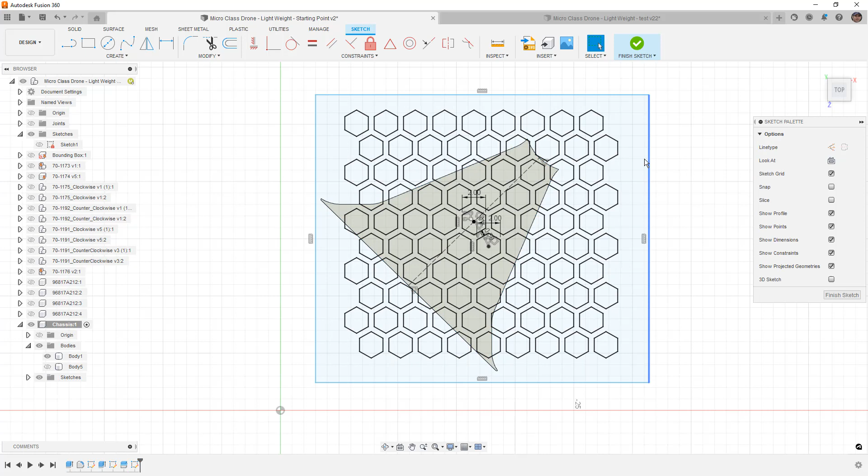The last sort of trick of this is going to be to just create a box around the outside. And then we also want to double click our profile here, and hit X to convert it. Now the reason we want to do that is because now what we're extruding is this sort of center section here. So when we finish this and we click extrude, we have one selection. We drag this down through our part, and we're going to use the intersect option. So what this is going to leave us with is only the material where we intersect.

And you can see that there are some little pieces that get sort of left behind. That little piece I'm going to remove. I don't need it. But then when I bring back my main chassis, we can combine these together, and now we've got this sort of structure inside.

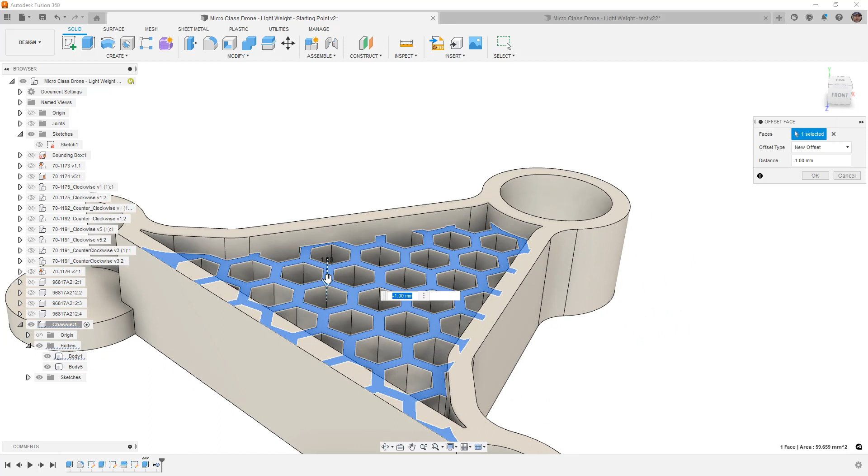Another thing that we can consider is that we're printing this thing from the bottom up. So I can use tools like press pull, which is Q on the keyboard, and I can drag this down a little bit, which will still give me some of the structural benefit. I'm still printing from the flat bottom, but now I don't need the extra material. And you can determine how much that saves by measuring the chassis. So we're going to go to our properties.

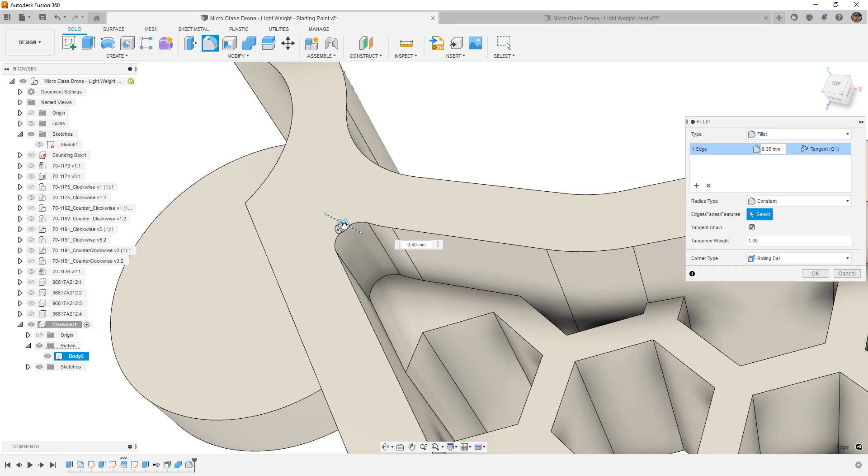So let's go ahead and combine these two together, joining them, and now we have sort of this unified geometry. This corner is likely going to be problematic if we try to fillet it, so I'm going to add one fillet first, and then I'm going to fillet again, and I'm going to add another one to sort of fill that in. If we try to do both at the same time, it will not be happy. I can promise you that.

And then we'll do the same thing at the bottom. We'll do one, okay, and we'll repeat it. And we'll take this one and just sort of drag it in. And that looks okay. So once again, let's go ahead and save, make sure that we don't lose anything. And it looks like, again, I want to make sure that we're in the top view. And then everything looks pretty good from here.

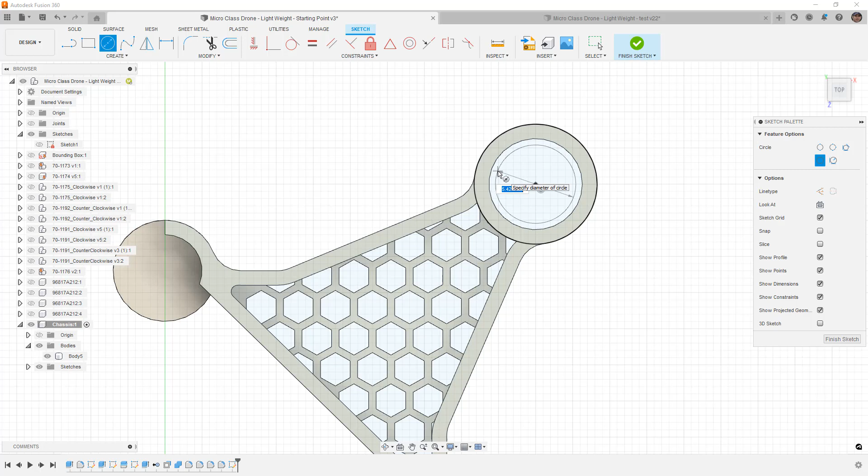Okay, so the next thing that we need to do is we're going to add the little cap for the motor. So we're going to create a sketch. And I'm going to do a circle that matches this diameter. And then once again, we don't want to print this too far in. We just need a tiny little stop. So I'm going to do 5.5 millimeters. And we're going to extrude this up just, let's say, 0.5 millimeter.

And that could be maybe wall thickness divided by 2 again, so to try to sort of keep with all of those values. And then once again, this prints okay on my machine, but you might find that adding a small chamfer here could potentially help. And another thing, if you happen to run into a situation where you've got things like these tiny little areas here, you can select these inside faces. So for example, these two faces, and hit delete on the keyboard. Fusion's pretty good about patching that geometry.

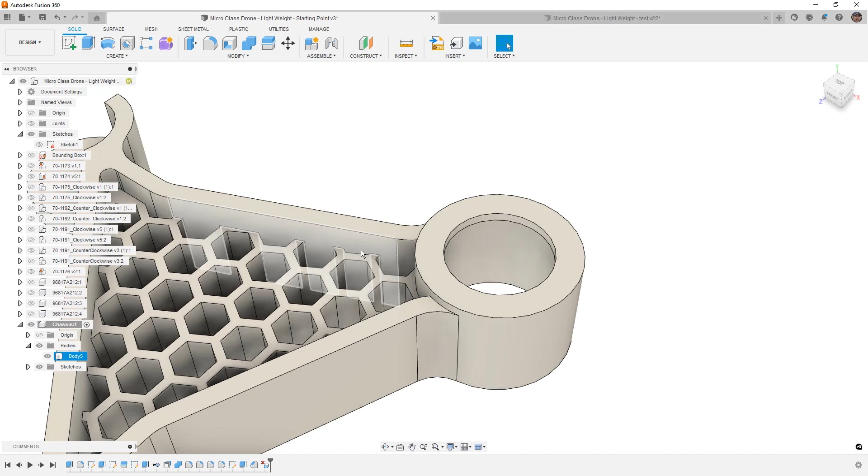Now, you don't necessarily have to get rid of those, but that small geometry really doesn't print very well. And so like that little pocket there might not work. I'm gonna hold down the left mouse button, select that inside face and hit delete. And you can see that it opens it up. If we instead select the other faces, so all 3 here, and hit delete, it'll be able to fill that in. So the selection does matter, but if you have any of those little areas, sometimes it's nice to just clean that up. Makes the printer job just a little bit easier.

Okay, so at this stage, we need to also think about the mounting holes for the controller. All right, so in this case, if you happen to buy the kit, it comes with some relatively tiny self-tapping screws, really small, not a hole size that you could print, something that you would definitely have to drill. Now, I found that those screws allowed a little bit of flexibility in where you could put things, but you weren't able to screw the camera down using that. You would need another big piece that would have to attach somewhere to put the camera.

Now, what I found worked well was to create a little bridge piece and use larger machine screws. So again, you kind of have to make that decision. I find that it was easier to print the holes and then drill them out to an appropriate size, so that way you don't have to worry about how accurate the printer is.

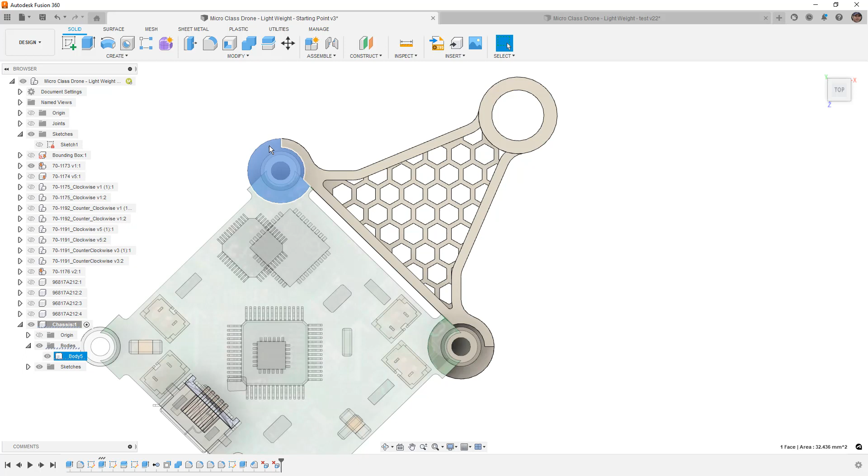So what I'm going to do is create a sketch. I'm going to do a circle, and in this case, I'm going to go ahead and just do 1.5 millimeters. And that'll give me something that's big enough that I can print out later. So I'm going to project that, and I'm going to do another hole here. And for this one, because I'm not on the dimension tool anymore, I'll just make those two equal.

I could also use the hole tool very easily because it'll allow me to find the center points. But in order to use it for multiple locations, typically you have to have something else there. You need to have a sketch with points there. So we're going to cut those through the chassis. And now we've got those holes.

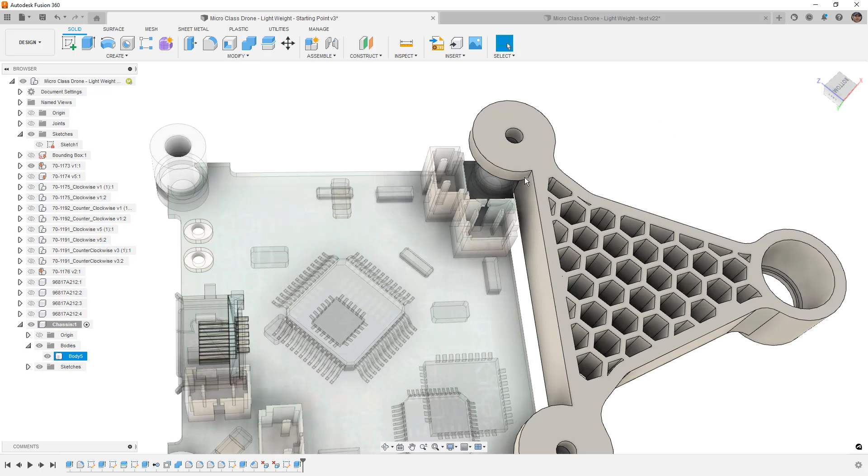Before I pattern this, I do want to add some fillets in here just to give this a little bit more structure. We want to make sure that we're not obstructing the connectors, so that's important. We need to be able to plug the motors in there. So let's go ahead and make this 2 mm, and that'll give us enough material.

And this little section here, I think I want to get rid of that. So I'm going to select these inside faces, hit delete, and allow it to patch it. So once again, those small openings, those are going to be harder to print. So if you can get rid of them, probably just a good idea.

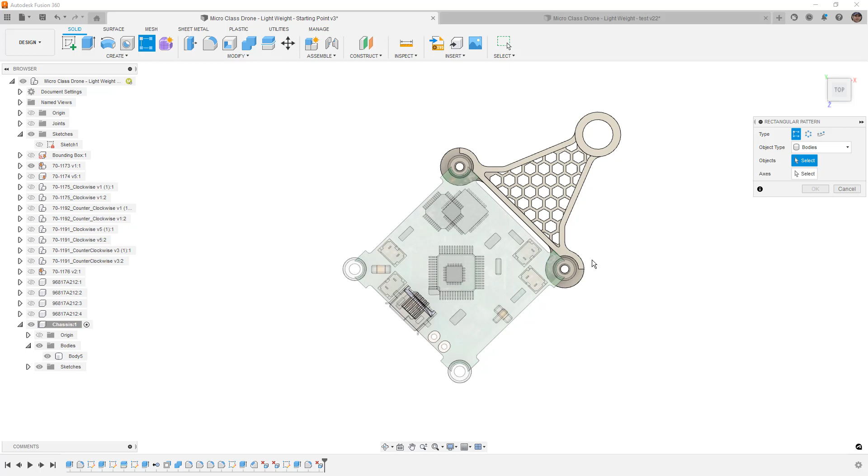All right, so now we have a quarter of our chassis. We can pattern this. And again, because it is a square, you could use rectangular. You could mirror over, in this case, the XY plane and then the YZ plane, or you could do a circular pattern of the body. Now, the circular pattern seems like the easiest option to me. If you are making a tri-rotor drone or something like that, then obviously circular pattern is pretty much the only option. But we can go ahead and just combine all these together.

And now we have a chassis, or at least most of a chassis. It's a good time for us to check the properties, see how close we are to that 4 grams that is sort of my ideal. And we're at 3.435. So that is pretty darn good in order to keep the weight down.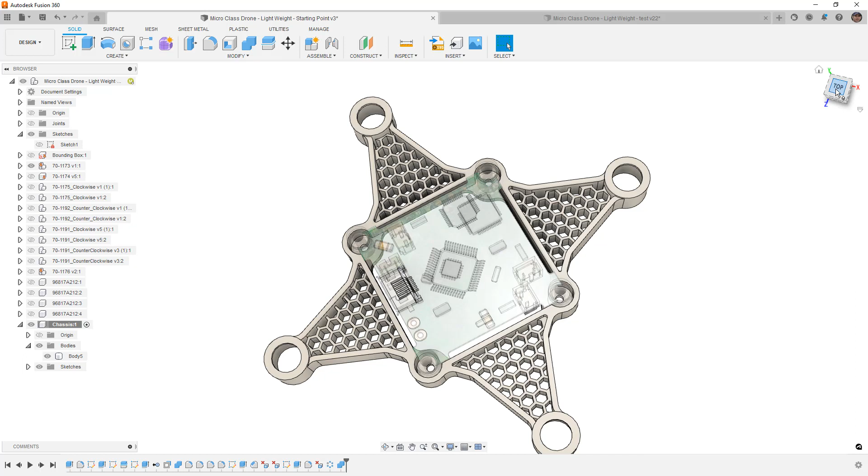Now, if you have a keen eye and maybe you've had a couple drones before, you might think to yourself, if they don't have that much force, why do we even need this sort of honeycomb section in the middle? You probably don't, honestly. You could probably get away with printing the outside and maybe having just one support rib in there. I think it looks pretty cool. It doesn't add that much weight, but ultimately you have to decide for yourself what your design is going to be.

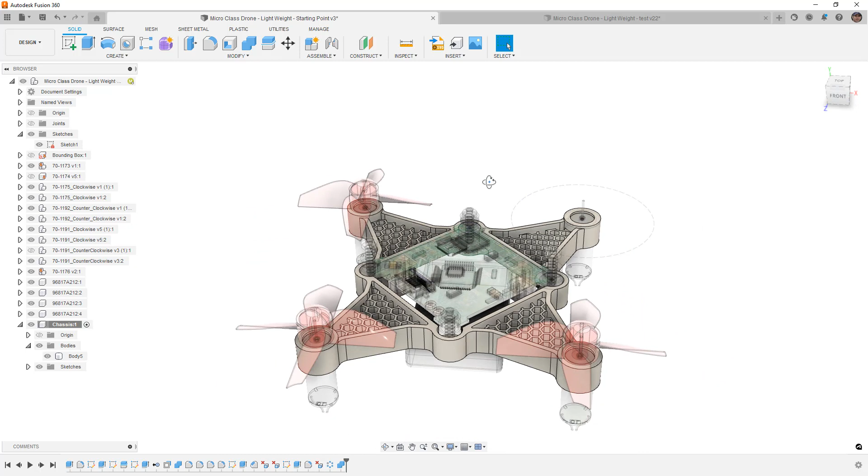So as I mentioned early on, we are not going to go through the entire process of creating a ready-to-go drone chassis for the competition. I think that the heart of the competition is that you make your own design. There is still one element of this that I do want to tackle, something that we haven't done yet, and that is the guard for the propeller. So we are going to tackle that part.

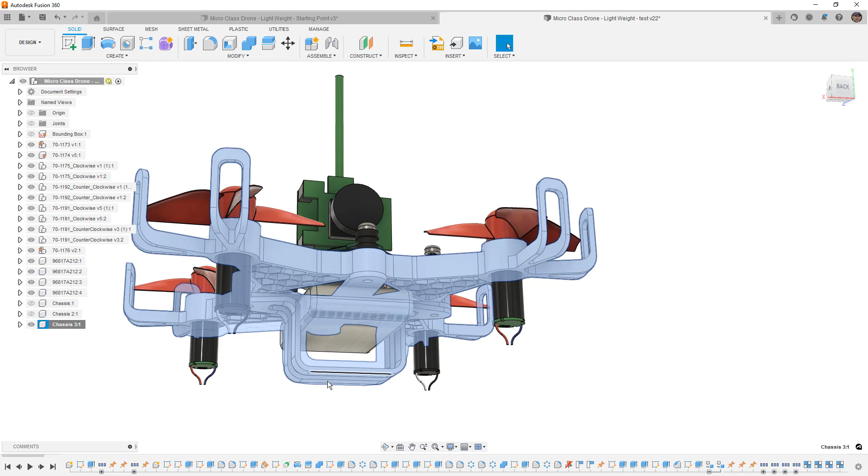We're not going to get into the battery holder area, which in my chassis here also doubled as landing gear. So it was the lowest point below the motors, and that allowed me to rest the entire drone on this. If it's not sitting level when you try to take off, because it has some automatic leveling characteristics, some of the props will spin because it's trying to auto level itself. So you do want to make sure that you have some sort of landing gear, whether it attaches to the motors or, in this case, I used the battery holder as that. But again, we're not going to approach that. We're going to be talking about creating our prop guards.

Now, when I look at this, the props are relatively high, but again, we're not going to be building up all the way around them. I want to really reduce the amount of support I need, and at this point, there are no supports needed. So what I'm going to do is start a sketch on the bottom, and then build out that prop guard. However, since we are patterning everything, the best approach is to go back before you pattern this body, build out the geometry, and then just roll past that body.

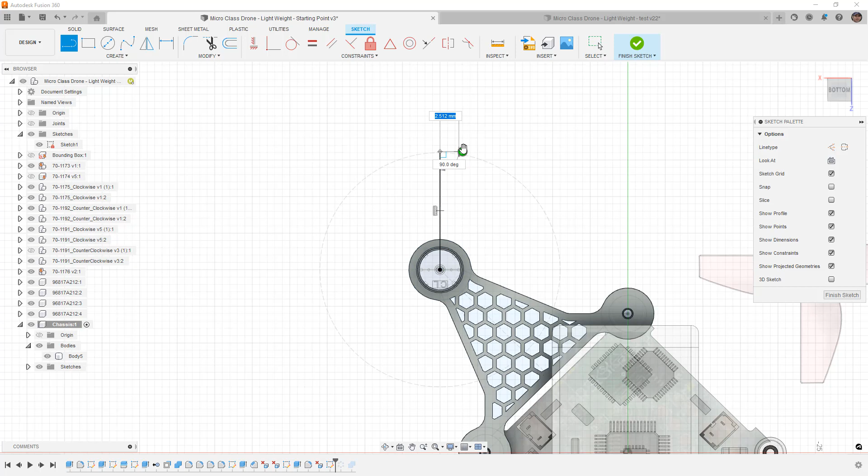So when we take a look at this, once again, we're really looking at a couple of things. We're looking at bumps from this position here and bumps from this position here. Now those two positions are essentially going to be where you would hit something. You could potentially hit it on the corner. So something at, let's say, 45 degrees would also be beneficial.

Now, a couple of things that we need to concern ourselves with or think about here. One is going to be airflow. We already are restricting airflow by having the chassis here. Now, this is a decent amount of restriction. In reality, we might want to shrink that down.

And everything is parametric with the exception of these delete faces. The second we added these delete faces, that direct editing is going to break any chance that we have of updating this easily. We'll talk about that in a second, but most of the things here that we did are going to be relatively parametric, so we can edit the design as needed.

I'm going to project that sketch, or at least that circle, into our design. I'm going to snap these to that. And then I'm going to create another circle and dimension this at our wall thickness, so once again, that 1 mm. What we're doing here is we're going to add just a small guard that's outside, but we need to connect it with something. And connecting it with something means that, again, we have these prop obstructions.

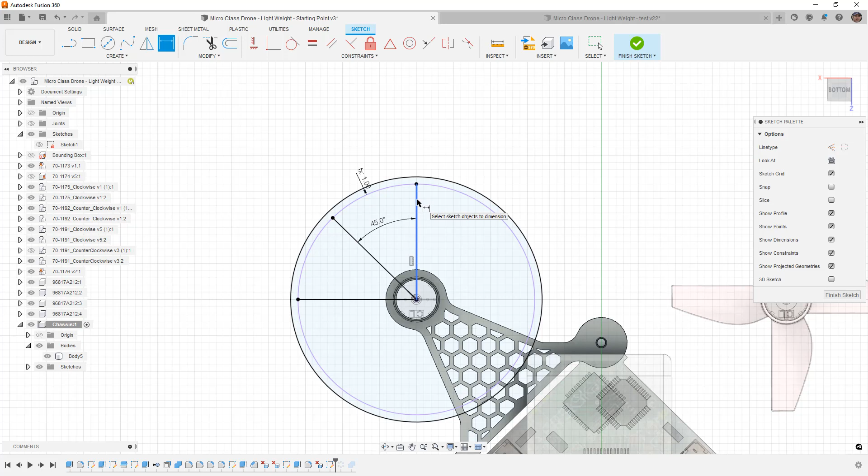So what we're going to do is use the line tool again. I'm going to extend a small line out here, one here, and one here. We can use the same honeycomb structure to build out, or we can just carry out a thin little section and connect these out. The way you decide to do it is really up to you. You can offset these in either direction.

I'm going to offset that. I'm going to make sure that I use wall thickness. I'm going to repeat that down here. I'm going to use minus wall thickness because I want it to go down. And then in the one here, I'm going to use wall thickness divided by 2, and repeat that, and it's going to be minus wall thickness divided by 2. The reason I'm doing that in the middle is because I don't want it to be offset. I want it to be symmetric.

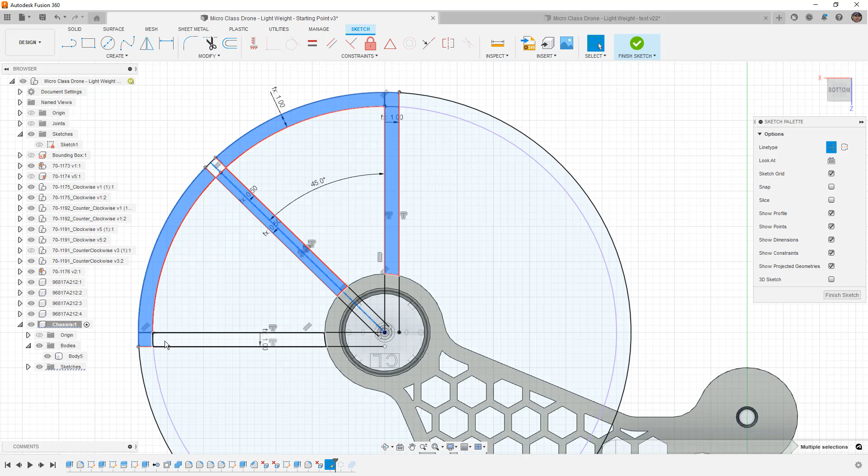So now we've got these areas that we can include in our extrude, and those will support the prop guard without really adding much obstruction. Again, you can go back and add some honeycomb in, but really all you're doing is adding some obstruction to it. So with that in mind, we're just going to extrude. I keep saying print. We're going to take this little section, and we're not going to take it all the way up, but we're going to add just enough that we've got enough support here. So 2 millimeters, let's do minus wall thickness times 2. And again, we're keeping all these parameters linked together.

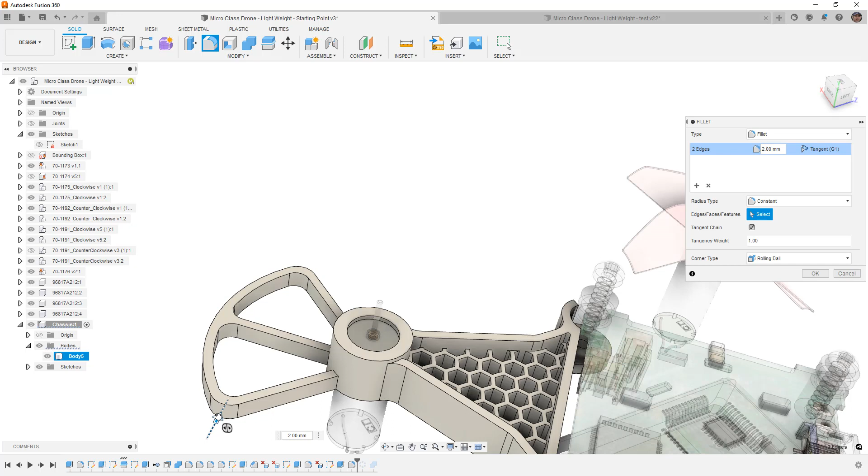Then we're going to add some fillets, because if this thing bumps into anything, we want to give it the best chance of surviving. These fillets can be whatever size you want. I'm going to add fillets to the outside, and these are going to be the additional thickness of it. We had 1 millimeter, so 1 on the inside, 2 on the outside. And I also need to do that where it connects to the chassis. So I'm going to hold down Control, or Command if you're on a Mac. I'm not too worried about the outside one being larger here because it's not a consistent wall thickness thing. But that gives us a little bump there.

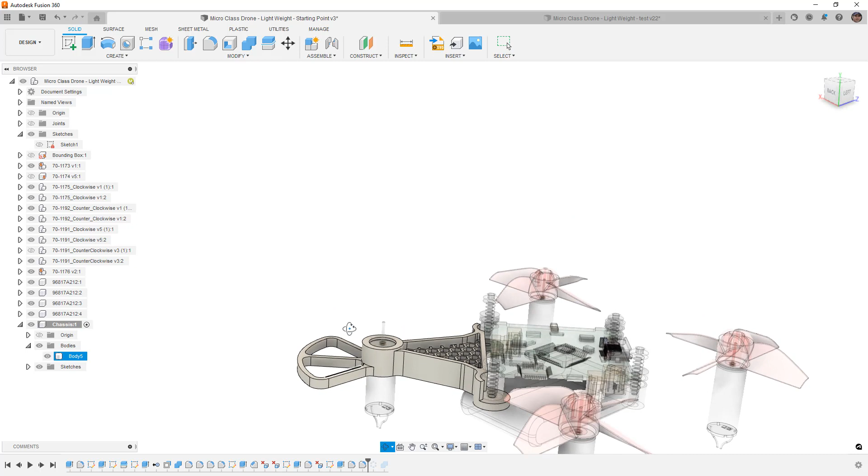Now we could get rid of this middle piece here and this would give a little bit of a spring. And if we want to do that, then we should consider potentially making this a larger diameter, because these things will flex a little bit, and if it's going to hit the prop anyways, it's not really doing you any good. So now, because it's part of the body, we can pattern it, and you can see that it comes out there.

We can double check our bounding box, make sure that we're still within the bounding box, and it looks like we just are. We could go just a little bit bigger to protect those props, but that does give us a couple of millimeters. We were already about 1 millimeter outside, plus another, so we've got 2 millimeters there. And that means that if we hit a wall on this side, it'll protect the props. There is a chance that you could intersect with something here, and if you want to carry that all the way back in, you certainly can. But again, the name of the game here is going to be minimizing the mass.

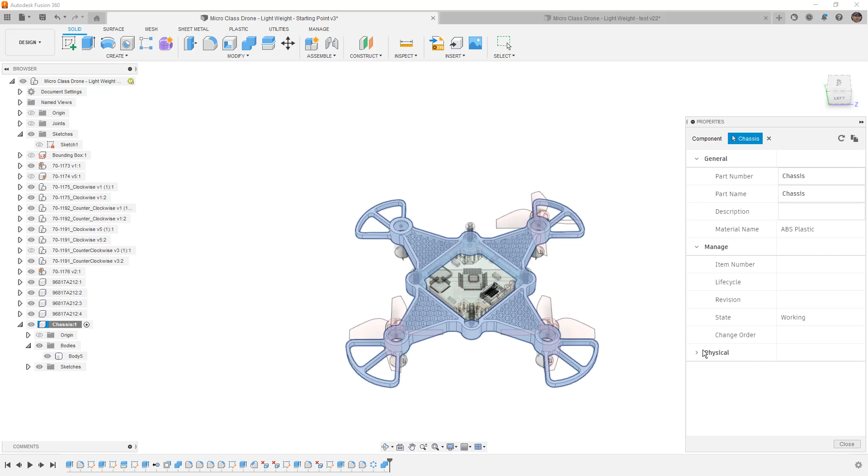So let's take a look at our properties and see how much that added to the overall weight. So when we take a look at this 3.981, we're still under that 4 grams. That was sort of the initial goal. So again, adding more around would potentially add enough weight to get us over that 4 grams. You could remove that middle piece, potentially make the middle one a little bit thinner so it does flex a little bit. All of these could affect the overall design.

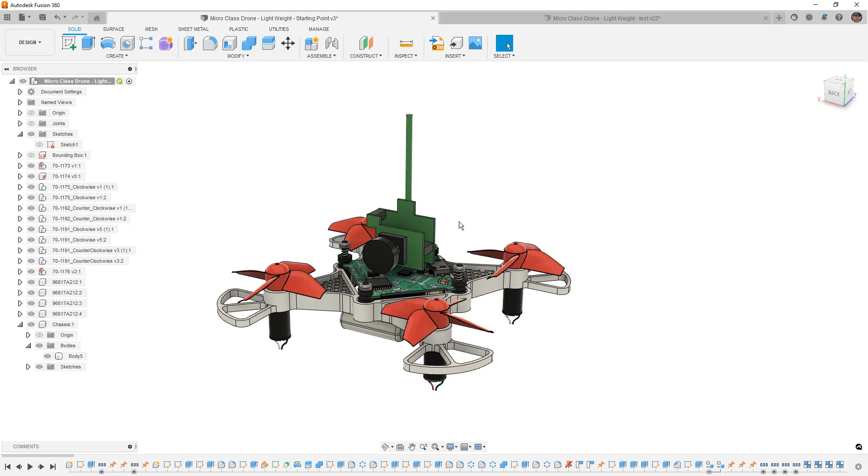So at this point, we have everything we need for the main chassis. The main chassis is done. We don't have a battery holder. We don't have the camera holder. And again, if you're running a camera, you need to run 2 batteries or you need to sort of find a way to power them both off of the same connector. You're not going to get a ton of flight time out of these things, so running the camera and the drone off of 1 battery is probably not ideal. It kind of just depends on what your situation is.

At this point, if you want to see more, if you like this, I can carry on doing a few more of these. If you want to see me print this and you want to see some video of it flying, let me know. I haven't printed this chassis. Obviously, we just drew it, so it's brand new. But I can certainly print it and assemble it and see how it flies and see where we can make some design decisions.

If you happen to tackle this through the Airgineers competition, or if you decide that you want to just make your own drone, you have any questions, please let me know. I'm by no means a drone expert. I have designed and built a few of these things, micro drones and full-size drones. So I do have a little bit of experience. Maybe I can help answer some design questions.

This is a pretty fun one because it's an indoor drone. It's something that you can fly inside, so you don't need to worry about getting the drone registered or having your license to fly outside. If you do happen to get into the larger drones, there are some additional criteria, things like registering your drone, which is a little bit interesting if you're designing your own chassis and you're printing multiples, how that's going to work. You will need to have a license. I think everywhere in the world.

I'm in the U.S., so our restrictions might be slightly different, but we have restrictions about how high they can fly, how close to an airport. I think it's within 5 miles you can't fly, up to 400 feet or so. Line of sight needs to be maintained. Even if you have FPV goggles, you still can only fly about a mile away from your position. So there are all these different things that you need to worry about when you're talking about the bigger drones that are obviously much faster.

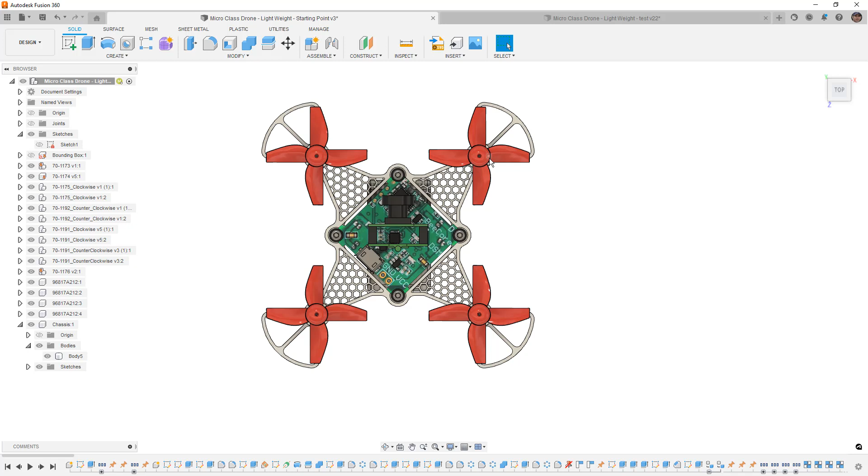Now, if you do design something for that, I would suggest caging the top of the propellers. If you land it on carpet or if you land near anything, then you can very, very easily catch them on something, and it might try to auto level itself, and they'll just be spinning. So fully protecting it is going to be important, but keep in mind that it's all a matter of the mass. So that is problematic. That's something that you need to deal with.

So once again, if you have any questions on this, anything that we covered here, please let me know. If you want to see me print this thing, assemble it, and fly it, let me know that as well. I'm happy to go ahead and print it and do that, but at this point, we're already over an hour in on this video. I don't want to just carry it on for another hour. So if you do want to see that, let me know.